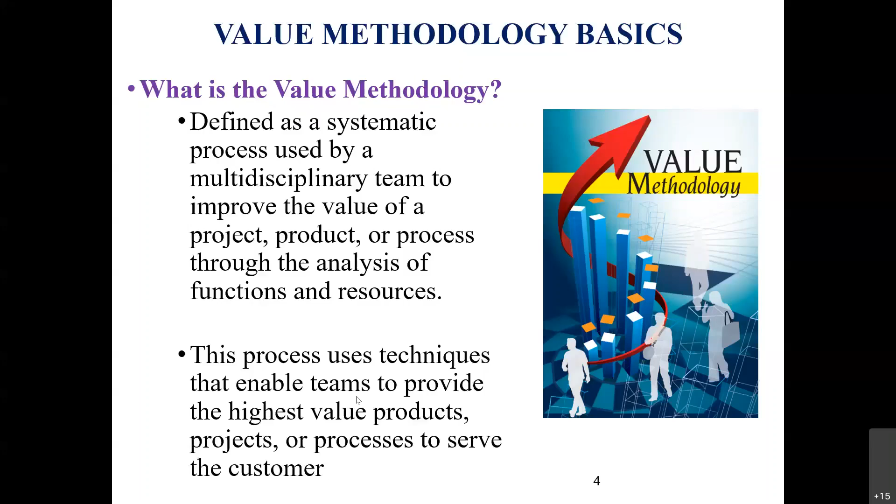So today the topic is value engineering. So what is value engineering? When you apply the value methodology to new products, projects, or processes, it is called value engineering. When you apply the value methodology to existing applications such as manufactured goods or projects, it is called value analysis. So value methodology can be either value analysis or value engineering. You can also call value engineering value methodology and vice versa. Let me give an easy example.

If you take a vehicle, it can be a Tata, Hyundai, Mahindra, or Ford. Let me take the Ford EcoSport for your understanding. The Ford EcoSport is already launched in the market. If you apply the value methodology to this existing product, which is already in use in the market, then it is called value analysis.

Let me give another example, of value engineering. If the company is going to launch a product in April 2021, and you apply the value methodology to the new product, project, or process which is going to be launched maybe next year or six months down the line, then that is termed value engineering. Okay.

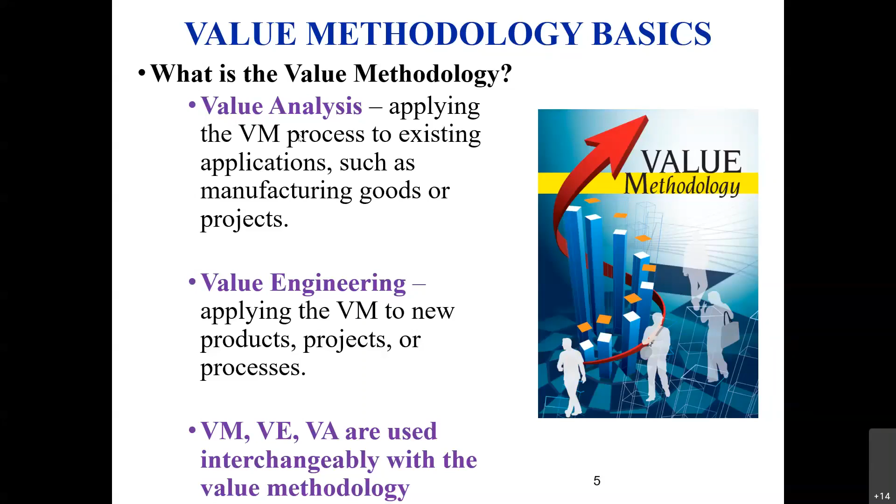You can use value methodology, value engineering, and value analysis interchangeably. Always remember that value methodology is a common name which can be used for either value analysis or value engineering. But there is a difference between value engineering and value analysis. Today I'm going to give some case studies which include not only value engineering but also value analysis. Okay, and this is very important.

First I will tell you what value methodology is not. Many would have thought at the start of the session that value methodology is a cost-cutting exercise. No, it is not at all a cost-cutting exercise. And it's not a quality reduction process; in fact, we are also going to increase quality through value. As I told you in the first slide, we have to create value without any compromise on quality. And value methodology cannot be applied without top management support. You need top management support to achieve it. This is an important thing you need to understand.

So let me go to what value methodology is all about. It's a process to identify unnecessary costs. This process will help you identify unnecessary costs and also unnecessary functions. And value methodology will help you identify potential performance improvements. It will also help you get alternatives while assuring quality, reliability, and life cycle cost.

What is life cycle cost? Life cycle cost is nothing but the overall cost required to manufacture the product. For example, it can be the labor cost, which includes indirect labor cost, and material cost, which includes direct and indirect material cost, overhead expenses, and miscellaneous costs, all included as part of life cycle cost. And the very important thing is that you need to meet the customer expectations and also try to exceed them.

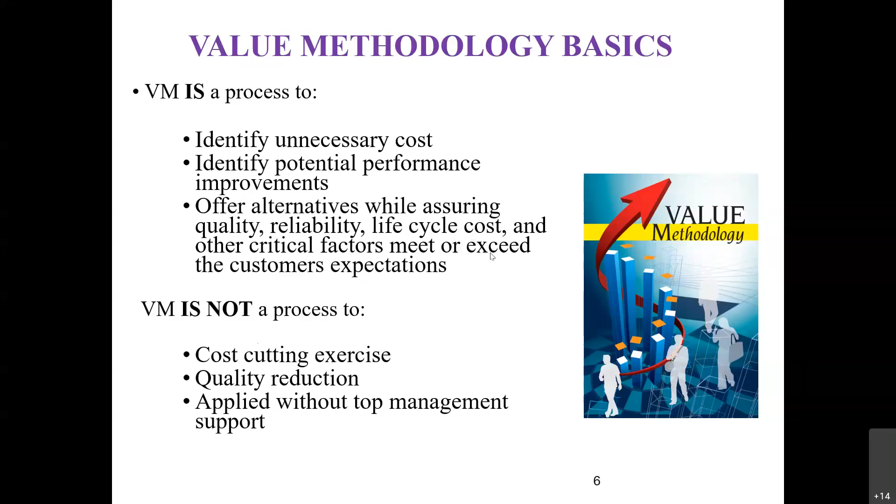In many cases, even if you are not exceeding the customer expectation, at least you have to meet the expectation. Okay, and this value methodology will help to meet the customer expectations.

And coming back to the value methodology history, this value methodology was started during World War II, in which Mr. Lawrence D. Miles is said to be the father of value engineering and also the father of value analysis. And according to him, the customer wants a function. Okay, what the customer really wants is a function. People want a function; they do not want the things.

Okay, what is the use when you're purchasing a vehicle which does not have an engine and transmission? Okay, so you can consider the vehicle as a thing, but the vehicle needs to have some function. Basically it's used for a mobility purpose. It needs to have all the required parts for its mobility. So the people want the function, not the things. So this is very much important.

And he is said to be the father of value methodology. According to him, the function analysis is very much important. So that's why even the definition of value methodology itself says that you are going to use the cross-functional team to achieve the value through the analysis of functions and resources.

Okay. So according to Mr. Lawrence D. Miles, the customer wants a function, and for this the company needs to do analysis, and that analysis is nothing but function analysis. And this function analysis is said to be the heart of the value methodology, so that you can achieve the value through the particular product, processes, a project, or even services.

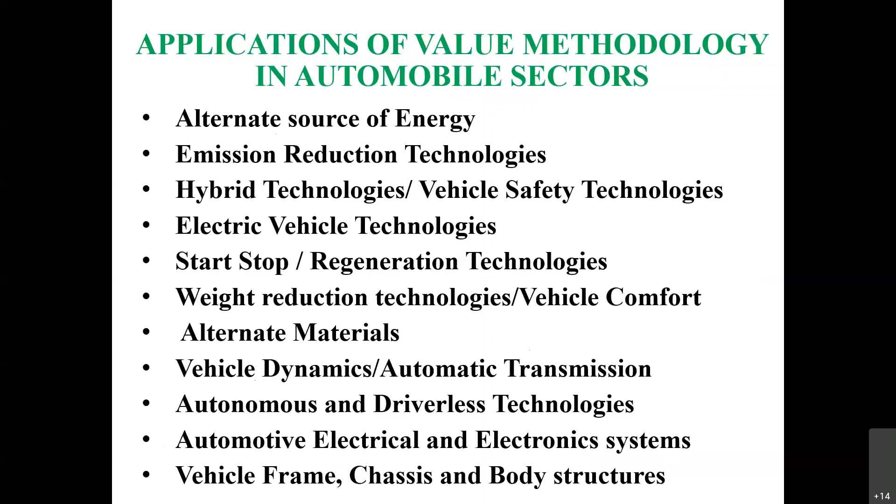So why do we need to use this value methodology? We need to use it to save time and to save money. Money is nothing but a resource, and time is also a resource. In fact, you are also going to improve the quality. At the same time, you are also going to satisfy the customer. All these are possible with the help of a cross-functional team, and that is possible by building proper teamwork.

So when you're using the value methodology, you are going to get all these advantages. You are going to save resources, which are time and money, and you are also going to improve the quality, which is nothing but a function. This is possible with the help of a cross-functional team or stakeholders, through teamwork. And finally, you're going to satisfy your customer. That's why you're going to use this value methodology.

You have a lot of values: social value, political value, economic value, judicial value. But as far as engineering application is concerned, the economic value is very important. This economic value has four types of values which this value methodology mostly deals with. The first one is the cost value: what is the cost of the particular product, process, project or service? That value you call the cost value.

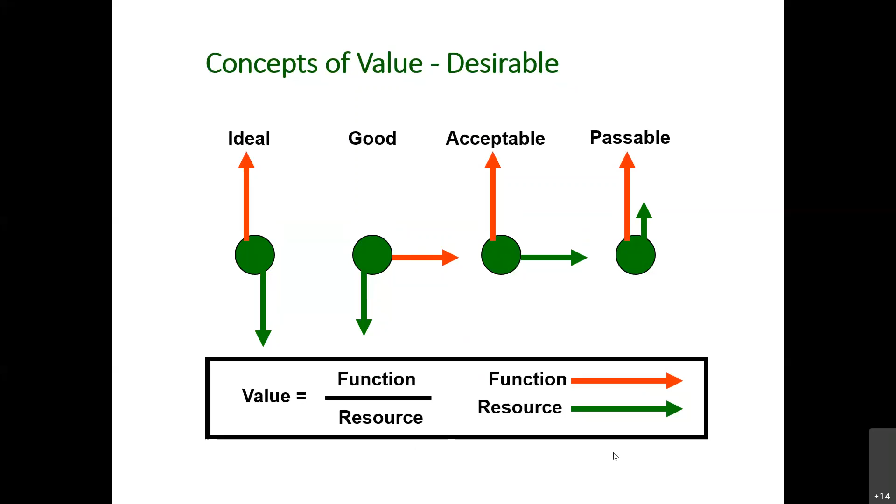So let me go to the function. You know all about the cost, but function is very much important. So what is called a function? Function is nothing but the intent or purpose that a product, process, facility, system or service is expected to perform, such that it will meet the need and want of the user. You need to satisfy that, and you should also make that particular item or service work as well as sell.

Say for example, when you're buying the brake from companies like Brakes India Limited, what OEMs like Tata, Mahindra, Ford, or Nissan will look into is that the brake will meet the want of the user as well as the need of the user. The user here is nothing but a customer. They will also see that the brake will work properly. At the same time, when you are selling the brake, you should ensure that the brake is also saleable.

Say for example, I told you about the exchange value. After a particular usage of the vehicle, you can also exchange the vehicle, so basically you're going to sell it. So when you're considering the function, you should ensure that the product you're going to purchase meets the need and want of the user. At the same time, it should work, and it should also be made to sell after a particular usage of time.

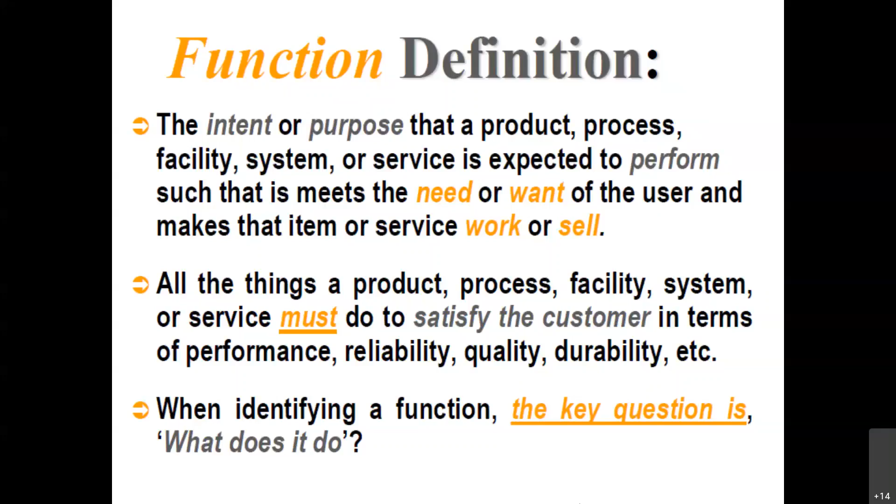So there are some facts about function. Function is nothing but what the customer is buying. You need to understand what functions the customer wants and needs, and what functions are not appreciated or not required. You need not provide functions that are not appreciated or required by the customer. So you need to understand the customer requirement in a very strategic manner, and in what cost-effective ways the company can provide the functions. That is very much important.

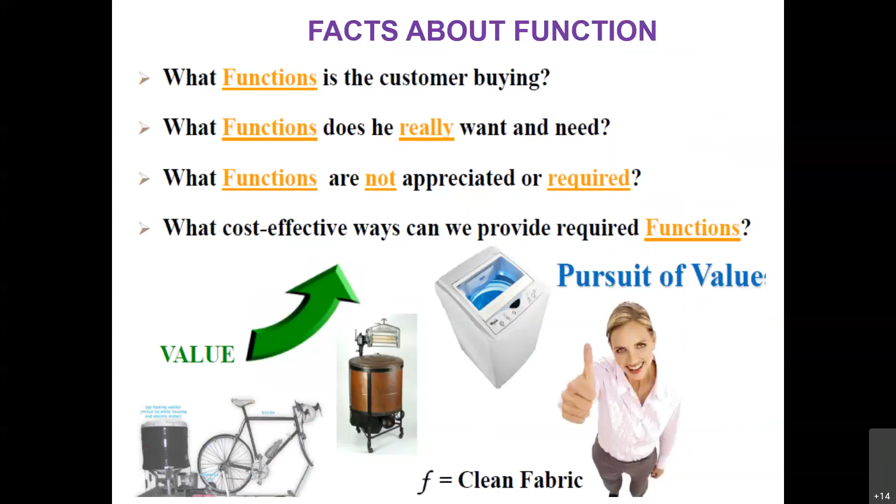And the one advantage with respect to the automobile is that volume is too high. You can take any OEM; all the OEMs' volumes are going to be higher. And when you save even 3% or 1% cost for one vehicle, say for example, if the particular vehicle is having 10,000 quantity in a month, you can have a very good saving. And again, in a year, you can calculate how much it is saving. So it is always advisable as far as the automobile is concerned.

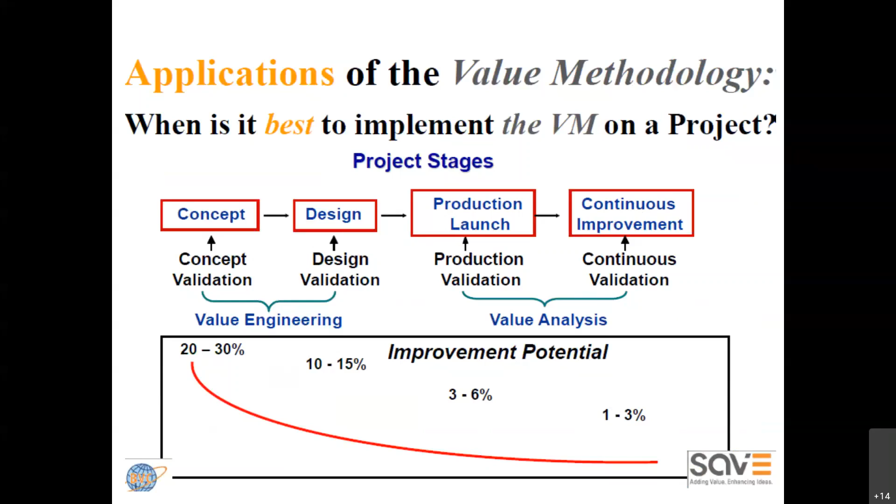And I normally stress more on value engineering rather than value analysis. But as far as automobiles are concerned, I always stress both value analysis and value engineering equally, because I told you the volume is going to be higher. But when the volume is going to be lesser, apart from the automobile sector, there are a lot of sectors, like machineries or heavy industries, for example. If you have less quantity, then value engineering is better than value analysis. But as far as the automobile sector is concerned, I always prefer both value analysis and value engineering equally.

Again, I told you, when you are applying value engineering for a new product, it starts with the concept. You have a huge potential net saving. But when the number of stages increases, the potential cost saving through value engineering gets reduced. At the same time, the implementation cost is also going to increase. The implementation cost is basically the validation cost. You need to validate it.

So suppose you are changing the material from aluminum to plastic, or cast iron to aluminum, or from X to Y or Y to Z, or when you're changing the supplier from one company to another company, you need to validate it. While you are doing validation, you need to go for some testing, for which you need to spend some money. That's why it is always good to test and implement the cost saving proposal at the start of the project. The implementation cost will be lesser, but when you are implementing any new ideas after production, you need to do a lot of validation, for which you need to spend money on validation cost.

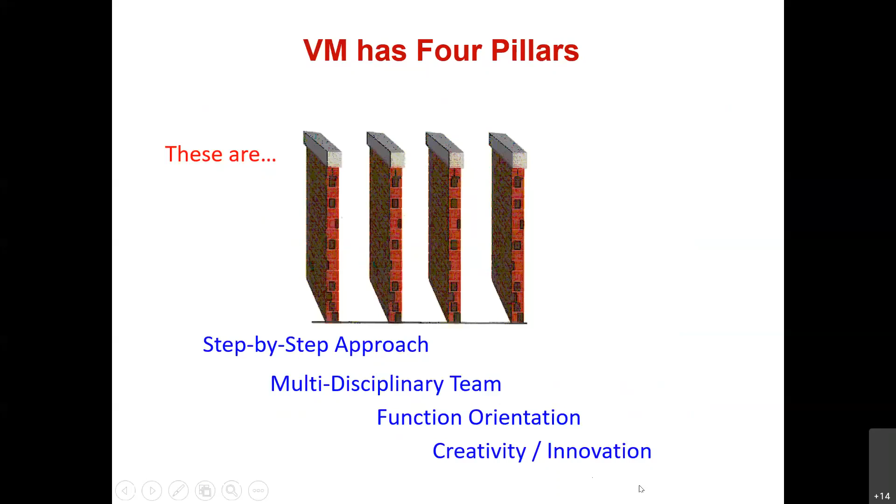I will just touch upon the manufacturing also. This value improvement is also possible in supply chain and also in manufacturing aspects for automobile application. But I'm going to give you some of the case studies with respect to products. Okay. I'm not going to give you too much on processes or projects or services, but this can be applied even to those sectors as well. If you are from a project background, or a process background, or a service background, please do let me know. I can give you an overview for that as well.

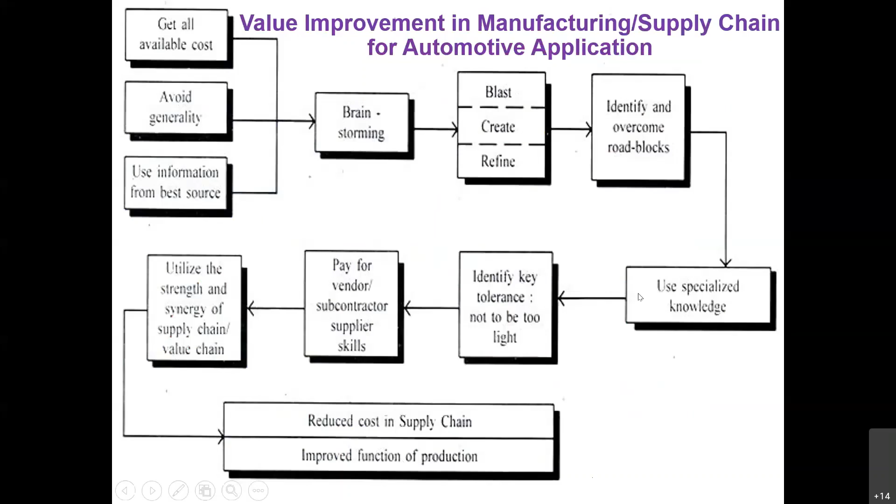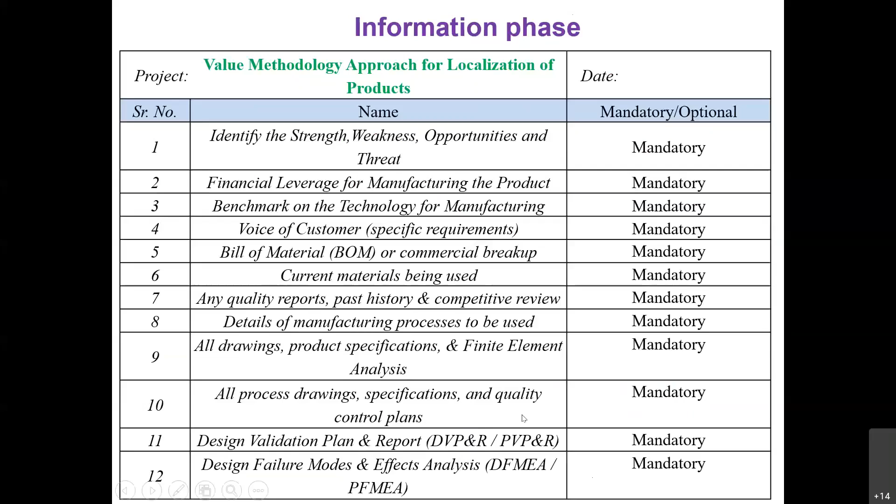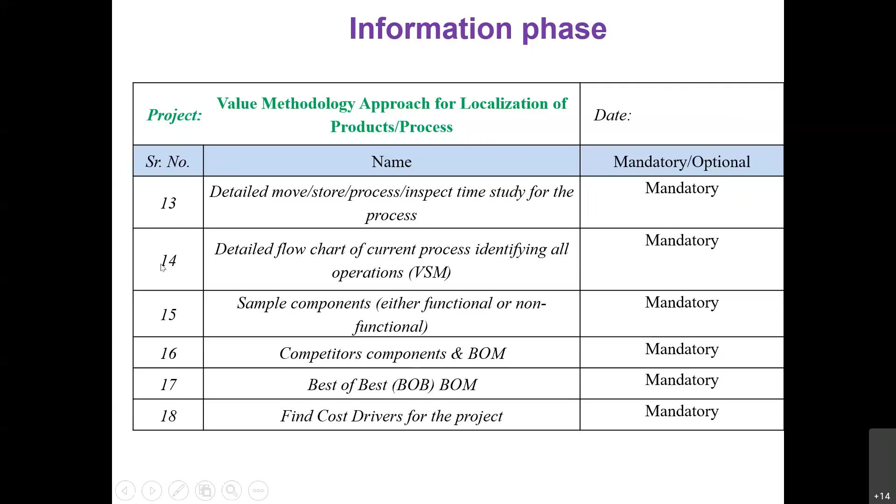the ideas can be easy to implement, or sometimes it may be hard to implement. So I need to identify whether it is easy to implement or hard to implement. But definitely you are going to get huge cost saving because you are going to reduce the weight. Or at the same time, I will take another simple example for you. I'm going to convert the aluminum manifold into a plastic manifold. So aluminum AlSiCu3 material I'm going to convert to polyamide PA6 with glass fiber of 30%.

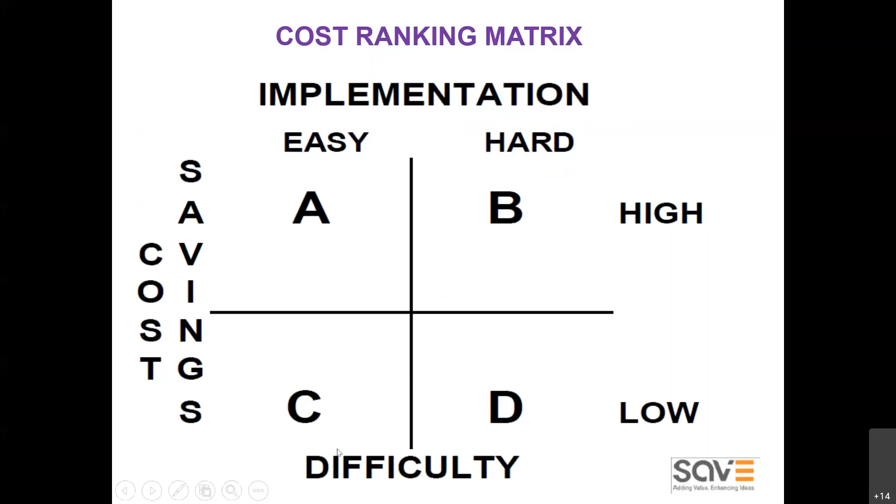Even this cost ranking matrix can also be applied in a different way, like A, B, C, D, E, F. So here A is the idea which is having high cost saving, which is applied for a running change, which is already in use, by changing the diameter, by changing the thickness, by changing the material, by changing the optimization of the design.

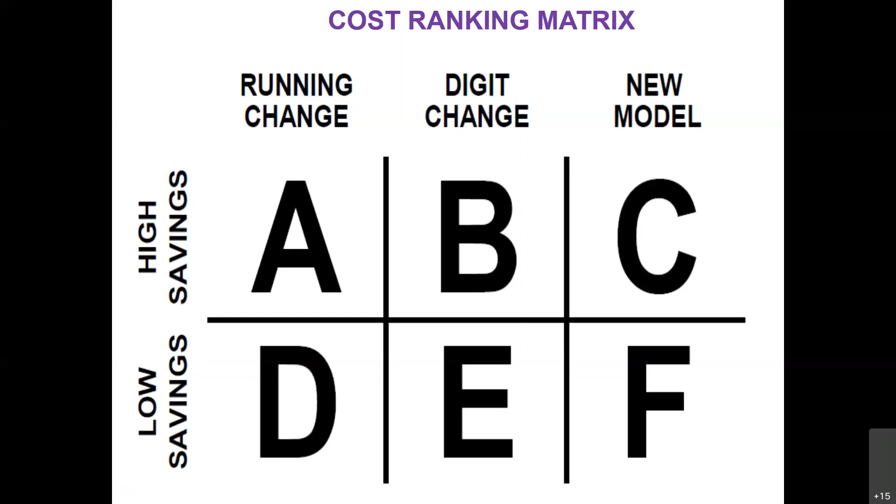So for a running product, if you do any cost saving, you can do it high saving as well as low savings. You can also do the digit change. Digit change in the sense that the thickness reduction, height reduction, or width reduction. And again, for a new model also you can go with the cost ranking matrix, high savings as well as low savings. This A to F just for easy purpose I have given; you can use as per your convenience, as per your company norms.

Next, finally, you have to go for a business case, because you are going to do the testing, which involves the tooling cost, development and validation cost. So you need to understand what is the total cost for implementation. What is the cost saving that you're going to get for one particular product? Then, with respect to the volumes, you can also understand what is the overall volume that you have for a year, and what is the overall saving that you can get when you're going for this value methodology approach.

You can also calculate the return on investment or ROI, and you can also present to the top management that whatever the money you are going to invest, you can get it back in 3 months' time or 6 months' time. You can present it to the top management, and basically, if you are going for a localization, this business case can be applied, but this template can be applied in a much better manner.

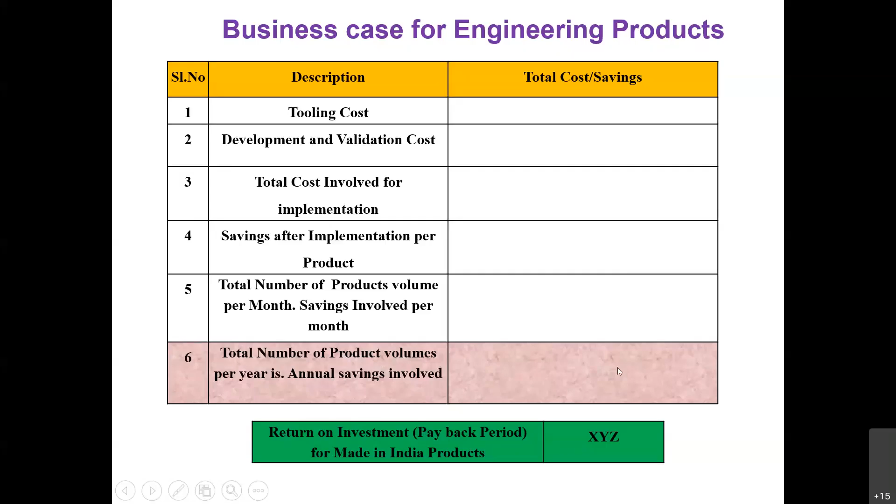Okay, so when you're going for a framework of any idea generation, you need to eliminate the ideas.

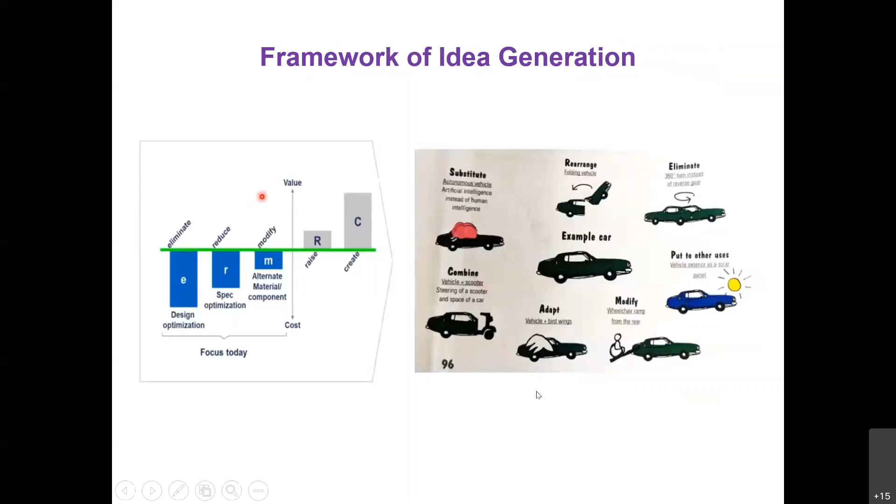There are many ways how we can achieve the value. The first one is by localization of the product, processes, services or projects, by changing the supplier. Say for example, if you're changing the piston supplier from Federal Mogul to Borgon, Shriram Pistons or India pistons. When you're changing the supplier, there will always be a cost saving.

Function improvement also you should look into. By changing the material you can achieve the value methodology. By doing optimization, you can achieve the value methodology. And again, make or buy decision: whether you want to buy or make.

Say for example, the crankshaft machining, camshaft machining or cylinder block machining. Some companies do it at the supplier end. Some companies have their own machining plant, their own OEMs, so they will do the machining of a cylinder block or a crankshaft.

Sometimes they feel that the cost reduction can be much higher when they make it in their own company. Sometimes they feel that when they're buying it, the cost saving is better, and at the same time the quality is also going to be higher. When they think that way, they can go for this make or buy decision analysis.

And we can achieve the value methodology by idea categorization, as easy and difficult to implement, with high to low savings. That's what I told in the A, B, C, D category. The ideas can also come from designers, tolerance stack-up, suppliers, experts, consultants, and the voice of customer.

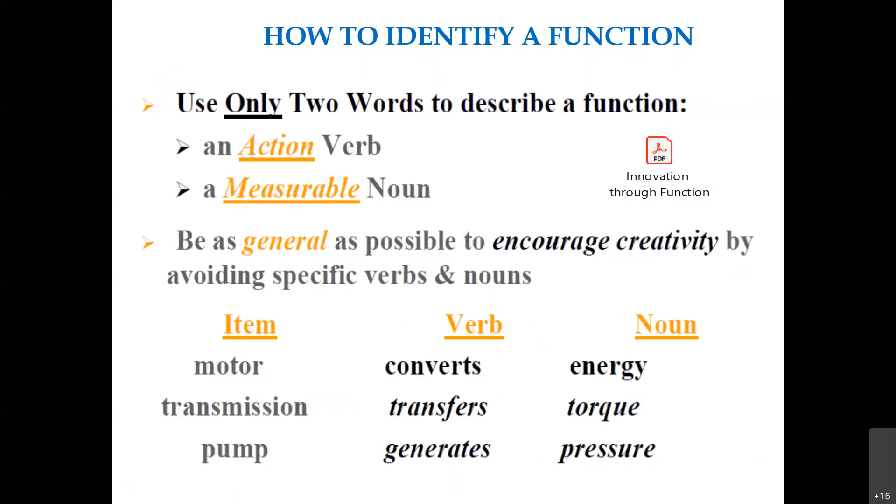So here, when you're going for a function phase, you need to ask the question: what are the key functions of the particular product? So you need to identify the basic function and secondary function. You should ask the key question: what are all the different key functions worth? Okay, you should understand what's the worth and what's the cost also, and which functions can be eliminated and combined.

Sometimes two functions can be combined. Sometimes some functions can be eliminated. You need to identify. And the technique here is the unnecessary and concurrent functions can be eliminated. And understand what functions have poor value. You can eliminate that particular function which has the poor value. And as I said, you should also look for the optimization of the design and drawing tolerances.

So in the function phase, you need to do some tasks which involve random function; I will tell you what's the random function. Then you need to classify the function into basic function and secondary function. Then you need to go for a FAST diagram, called function analysis system technique diagram. And you need to analyze the cost worth relationship for each individual function. Then you need to complete the cost function worksheet in the function phase.

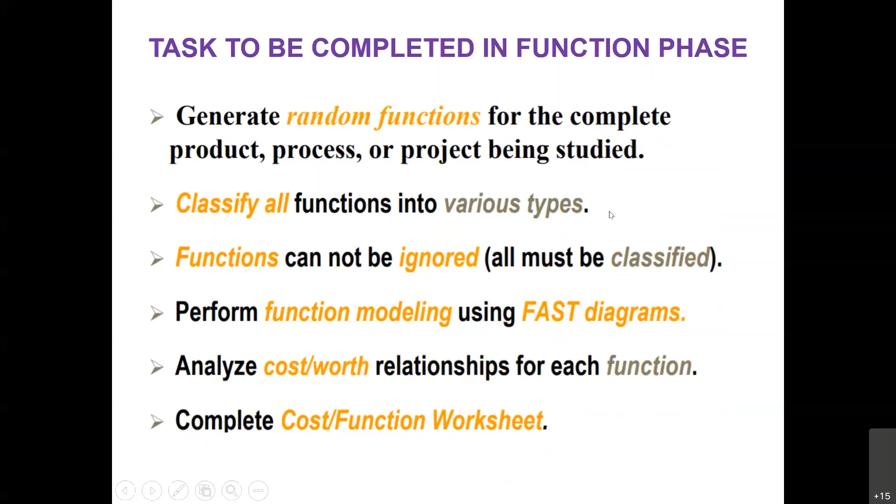Okay, this is the template that normally we have for a function analysis, random function analysis. So here you need to write down the component name. Suppose the brake is having a brake pad, caliper. You need to list down all the component names, basically bill of material, and what is the cost involved for the bill of material. Then you need to list down all the functions randomly, basically basic function and secondary function, using verb and noun combination.

This is the template. Then you need to allocate what is the cost percentage, what is the cost involved for a particular individual function. Okay, and what is the value? What is the function cost value? You need to put it. This is just a normal template that you have. This is the example of a gearbox. Gearbox is having a lot of parts. I have taken only 3 parts: housing, gears, and shaft. This is just an example. This I have used for training purposes.

The housing component of a gearbox has a cost of 3,213, which contributes to 57% of the overall cost of these three. And gears is having 1,714 rupees, and shaft is having 727. Okay. So first I need to understand which is the highest cost contributing factor, and you need to list down.

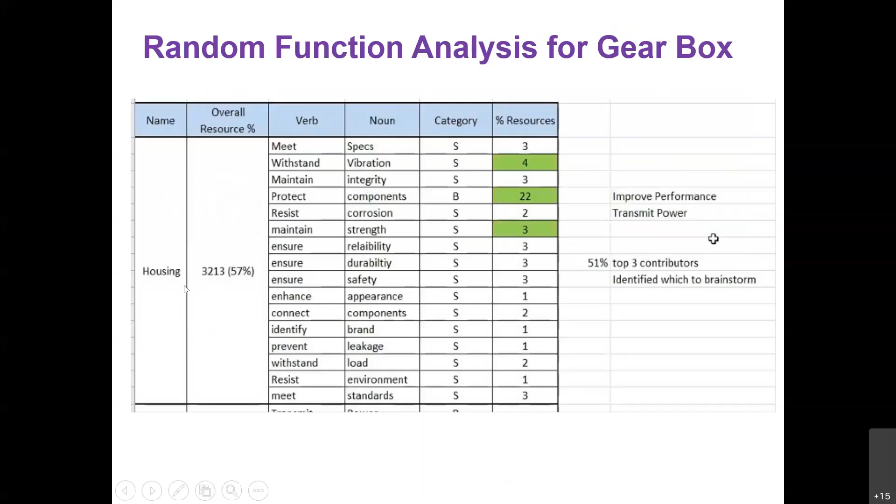Okay, and we should list down all the parts that are involved in the gearbox. So here I have taken only 3, just for training purposes or just for understanding purposes to explain to you. So what are all the functions of a gearbox housing? Okay, the basic function of a gearbox housing is to protect components. Inside the housing, it is having a lot of components like gears, shafts, etc. So what is the basic function of a housing? The basic function of a gearbox housing is to protect components. One verb and one noun.

You have different functions of a housing. It should meet specification, it should withstand vibration, it should maintain integrity, it should resist corrosion, it should maintain strength, it should ensure reliability, durability, safety, appearance. It should also connect components. Even the housing should identify brand. Who is the supplier for the housing? Okay. For that, it should identify the brand.

It should also prevent leakage. It should withstand load. It will also receive force. It should also resist environment. It should meet standards. So you need to list down all the functions of a housing, which is a part of a gearbox.

And next is the gears. What is the basic function of a gear? The basic function of a gear is to transmit power. And you have different functions apart from transmitting power. It transmits torque, it generates rotation, it ensures reliability. So you need to list down other functions of the gears.

Similarly, the shaft. What is the basic function of a shaft? It transmits power. In addition to transmitting power, it also transmits torque. You need to list down all the functions similar to what you have done for gears and housings.

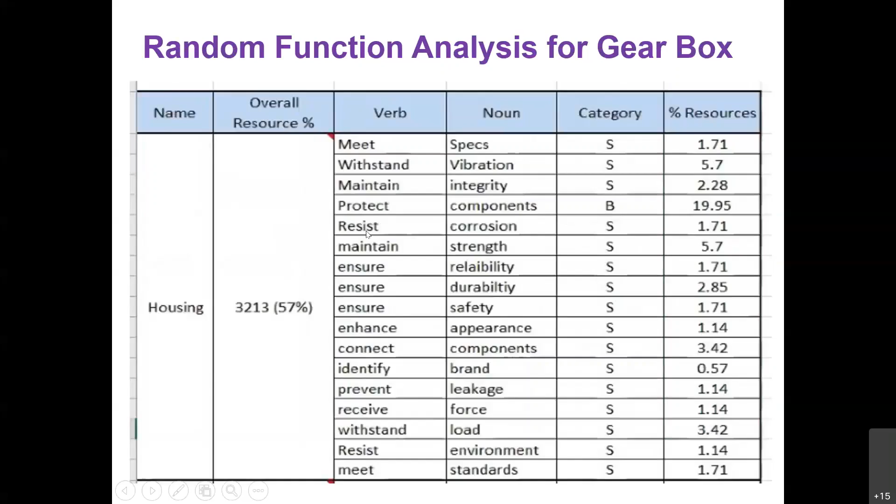First, you need to list down what is the basic function of a part. What is the basic function of a gearbox? A gearbox may have housing, gears, and shaft, but here you need to list down the basic function of a gearbox alone. Then, what are the secondary functions? You need to list them down using the how technique and why technique.

You have the project objective. These are all the functions that are required to achieve the project. And a one-time function involves the functions which are required one time. Say, for example, ensure warranty. All these are one time.

Or protecting the product. Say for example, if the brake or suspension is coming from a tier 1 company to an OEM, the tier 1 company is going to ensure you warranty, and at the same time they are going to pack it in a safer manner. They are going to protect the product and send it. So all these are one-time functions.

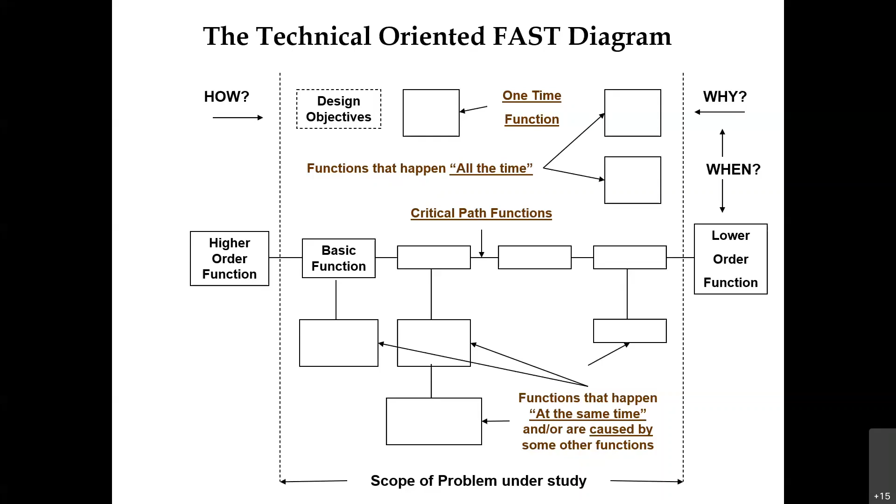All-the-time functions involve functions which are required before you sell the product to the customer. Enhance appearance, ensure safety, reliability, durability. These are a few examples of all-the-time functions. Let us go with the FAST diagram for a gearbox. The basic function of a gearbox is to transmit power.

Why transmit power? When I ask the question why to the basic function, it becomes a higher order function. So why do I need to transmit power? The higher order function is enhance performance. The basic function of a gearbox is to transmit power. How to transmit power? By transmitting torque.

How to transmit torque? By generating rotation. How to generate rotation? By transferring force. How to transfer force? By receiving force. How to receive force? By applying force. I'm going to apply force to the gears. The gear receives force.

Why receive force? To transfer force. Why transfer force? To generate rotation. Why generate rotation? ... It should transmit to increase my performance. So here you follow how logic and why logic. This is a lower order function, this is a higher order function.

And project objective indicates the objectives, which involve meeting specifications, meeting standards, preventing leakage, providing strength, durability. All these functions you need to list down here. And a one-time function is, for example, ensure warranty. And all the all-the-time functions you need to list down here.

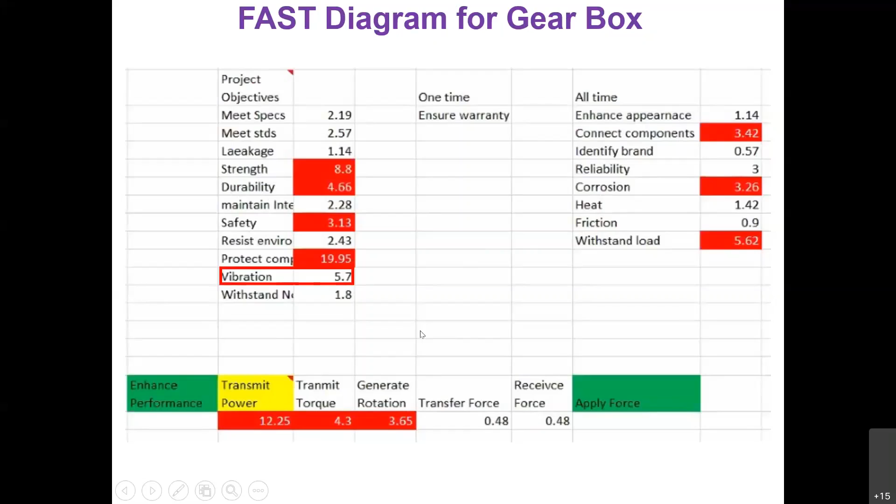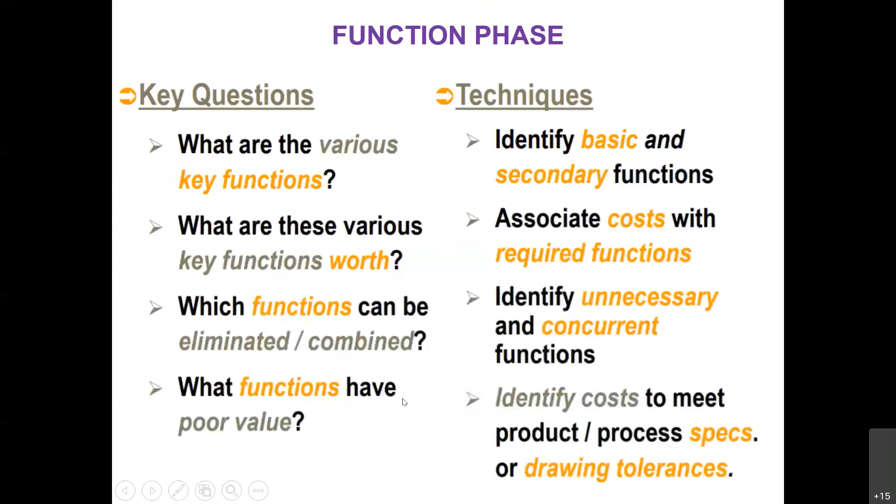Then you can create ideas for the highest cost contributing function. You don't need to take all the functions for your idea. The top three or top four functions contributing to the highest cost, then you can go for idea generation for those particular functions. Idea generation can be the ideas what I told. You can use all these techniques for your idea generation, but all these techniques should be used considering the functions.

Let me give examples with respect to the FAST diagram for some automotive components. Basic function of a vehicle leaf spring. The basic function of the leaf spring is to improve comfort. Why to improve comfort? To enhance drivability. When I ask the question why to the basic function, it becomes the higher order function. How to improve comfort? By maintaining damping and also by absorbing shock. How to absorb shock and maintain damping? By distributing load. How to distribute load? By transferring force, by applying force.

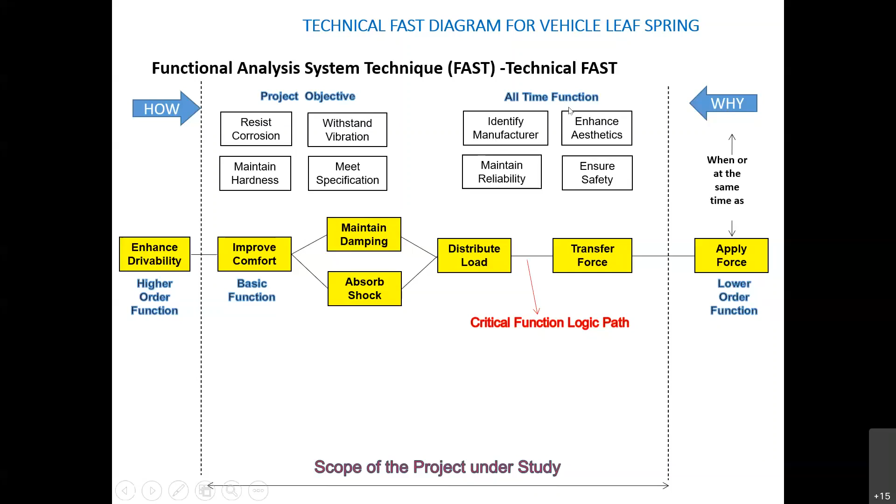The leaf spring should withstand vibration. It should meet the specification. It should also maintain hardness. And the all-the-time functions: it should identify the manufacturer, it should enhance aesthetics, it should ensure safety. At the same time, it should maintain reliability.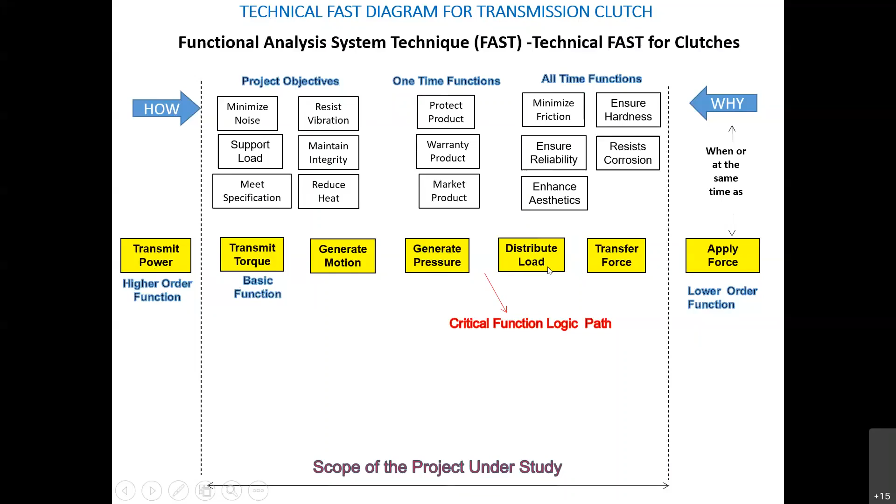Okay, let me go with the clutch. What is the basic function of a clutch? The function is to transmit torque. And the way to transmit torque, to transmit power, it's almost the same. How to transmit torque? To generate motion. How to generate motion? By generating pressure. How to generate pressure? By distributing load, by transferring force, by applying force.

Okay, you know the synchronous ring in a transmission, where the basic function is to match speed. Why do you need to match speed? To avoid slippage. The company is spending money only to match speed, not to avoid slippage, because the basic function of a synchronous ring is to match speed. The slippage gets avoided. How to match speed? By generating movement, by transferring torque, by distributing load, by maintaining position, by enabling rotation, by transferring force.

Function of your crankshaft. Again, the basic function of your crankshaft is to transmit torque. Why transmit torque? To develop power.

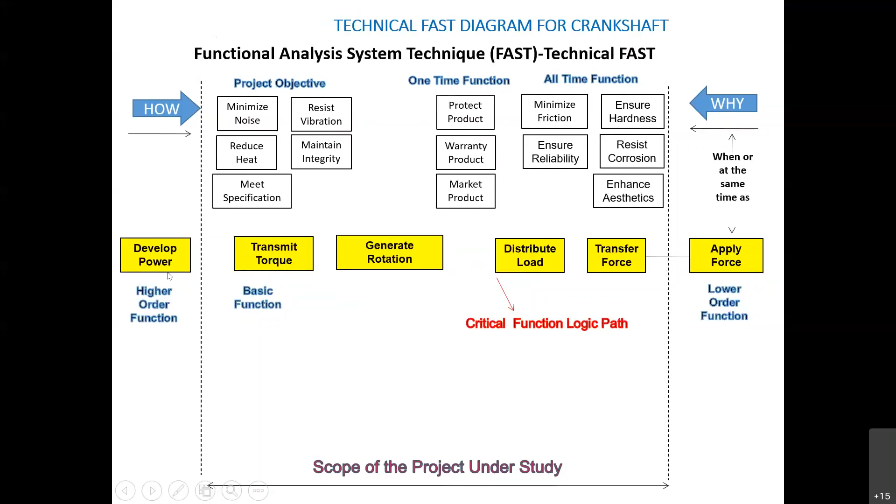Okay, this is the compressor, the AC compressor in an automotive vehicle. The basic function of a compressor is to condition air, for comfort. How to condition air? By compressing fluid and also circulating air. And how to compress fluid? By generating pressure, by connecting circuit, by selecting mode, by applying force.

Why do I need to apply force? To select mode, to connect circuit, convert energy, to generate pressure, to compress fluid, and also when I'm compressing fluid, I am also going to circulate the air, and finally I'm going to condition the air. So these are all the project objectives. You have one-time functions and all-the-time functions. Okay.

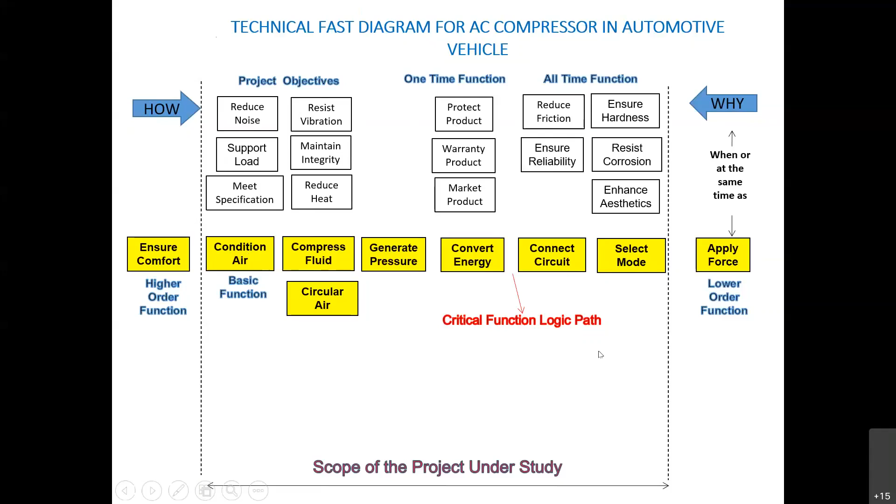So this is an example of a stamping process. The basic function of an overmold stamping process is to overmold stamping. Why overmold stamping? To bond the assembly. How to overmold stamping? By injecting plastic and also generating the stamping process. So you have different functions. It follows the how logic and the why logic.

So here the project objective is to verify the dimensions of the machines, maintain tooling, and also durability. The process should be controlled. And the all-the-time functions can be: maintain appearance, it should prevent injury, it should also ensure reliability, it should also reduce scrap. So this is just an example of a process as well.

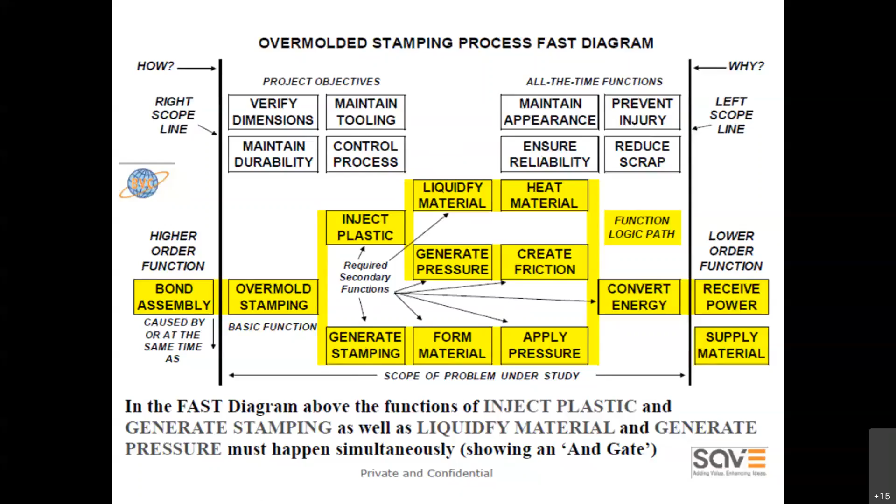Let us go for some of the case studies using function. Okay, so this is the utility pocket which has been replaced with injection molding. It is basically the bottle holder. This bottle holder was made of metal previously. That has been replaced with a plastic component using injection molding. So this is a bottle holder. Nowadays you use this injection molding process, so you have very good aesthetics.

In olden days, you had the bottle holder made of either sheet metal or metal, where the weight was also higher, the aesthetics were not good, and the cost saving is going to be lesser here. And this is an example of the value methodology. Before it looked like this, and after it looked like this.

Before that, you had electric power assisted steering, and now through this value methodology, you are going for hydraulic power assisted steering, and again the cost is going to be lesser. At the same time, you see here, it is not the cost saving alone. Hydraulic power assisted steering is provided in place of electric power steering. Both are achieving the same function, and the performance criteria are also the same. But the hydraulic assisted steering is going to have a huge monetary benefit.

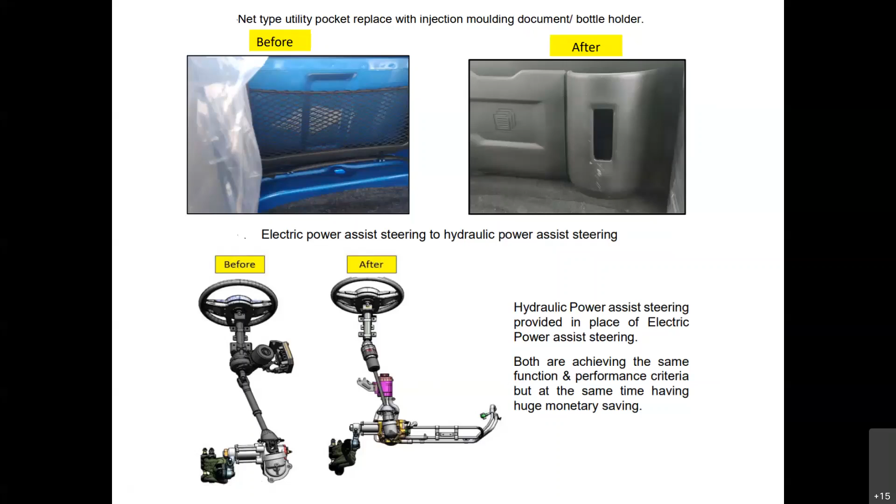And this is the value analysis that has been done in a vehicle door trim. So the whole trim is having the structure like this, and you see the structure of the whole trim, and you see the structure of the new trim having the armrest. Okay, and you see even the inner handle or the upper substrate. Aesthetic-wise, there is an improvement here, and even you see

even this is the switch bezel, and there is some modification which has been done, and the advantage we have with respect to this is the cost saving is going to be higher. At the same time, the aesthetic is also going to be much better with the help of the new door trim. And here the function is not going to get affected. At the same time, you are going to reduce the cost, and aesthetic is going to be higher.

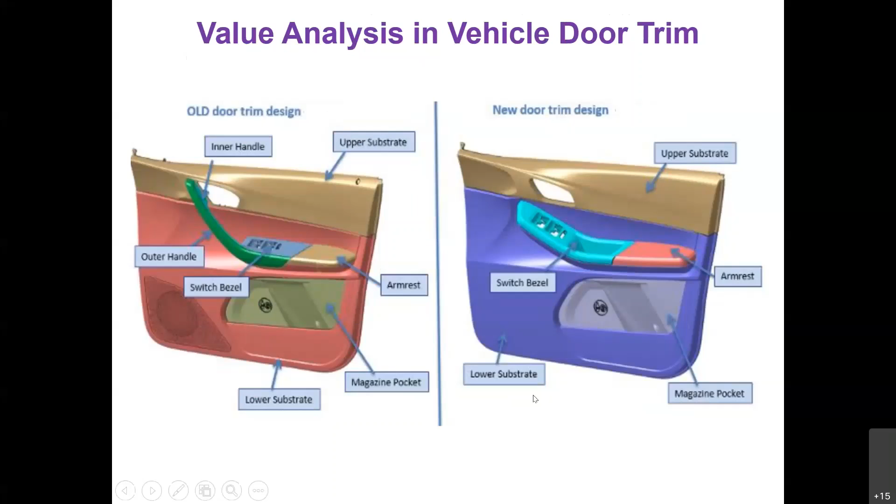This is the clutch housing. I have given you a FAST diagram. So here by analyzing the functions, I'm going to reduce the weight. Okay, and it's not just I'm looking at the product. I'm going to reduce the weight, but here the weight reduction of 10% will help you reduce the cost as

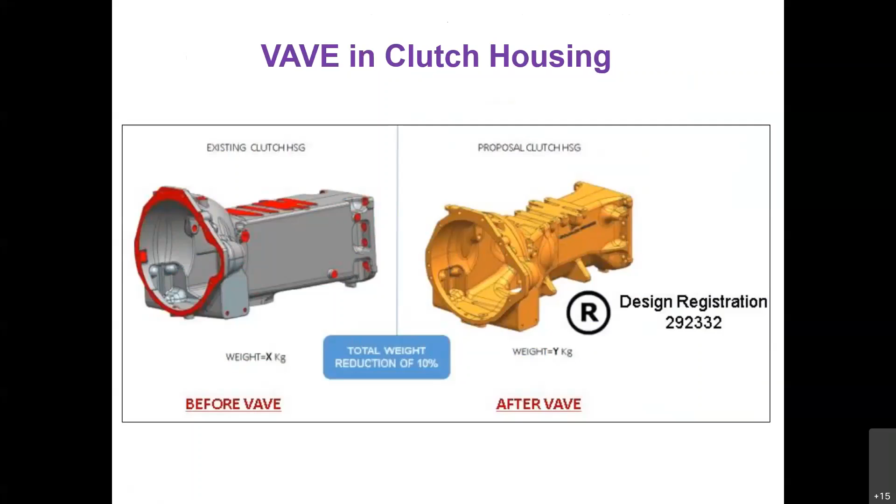well. And again, the weight you're going to reduce is not going to affect the vibrations or other aspects as well. So here, what is important is you are going to create ideas or generate ideas considering the functions, not generic things. Okay, so you need to look at the functions and then you create ideas.

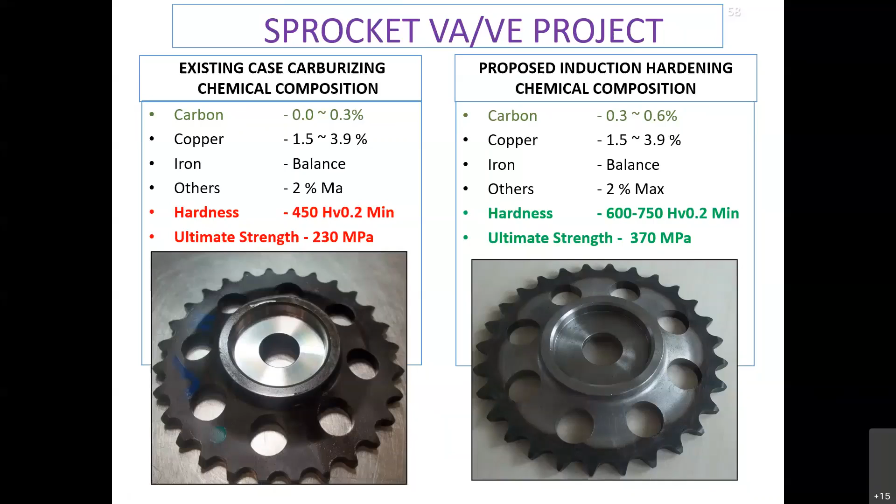At the same time, hardness is going to get increased. At the same time, ultimate strength is also going to get increased. So here you have an advantage where the value is getting increased by increasing the function and at the same time by reducing the cost. This is one of the examples which has been done in car roof rails.

This is the assembly of the old roof rail of a car. So this is the modified one. Basically, this roof rail is used for aesthetic, not only for aesthetic, even to hold some of the weight or object, but mostly people use it for aesthetic purpose. So here, without affecting the function, there is some change of the raw material from this to here. At the same time, not only the aesthetics, but even the function remains the same.

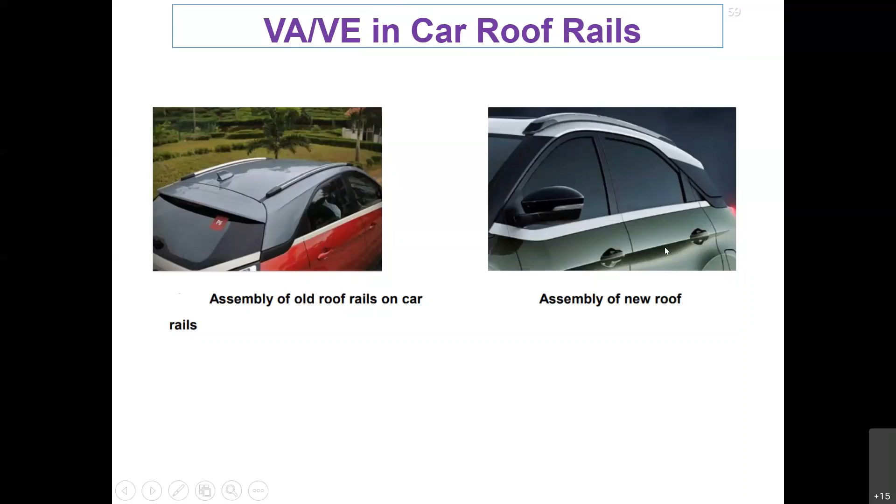So I told you this can be even applied for a manufacturing process. This is the connecting rod manufacturing process, before value methodology, which is having a lot of stages. It includes face grinding, boring, turning, slitting, milling, boring, again grinding, and then final inspection. So after this value methodology, without affecting the function or the process of the connecting rod, the manufacturing process has been optimized, and

here the cycle time of manufacturing gets reduced. And when you reduce the cycle time, you are going to reduce the manufacturing cost also. At the same time, the extra processes and extra machines which are there also get eliminated. So you have the better process. So you have lesser manufacturing cost. When you have a lesser manufacturing cost, your overall product life cycle cost gets reduced.

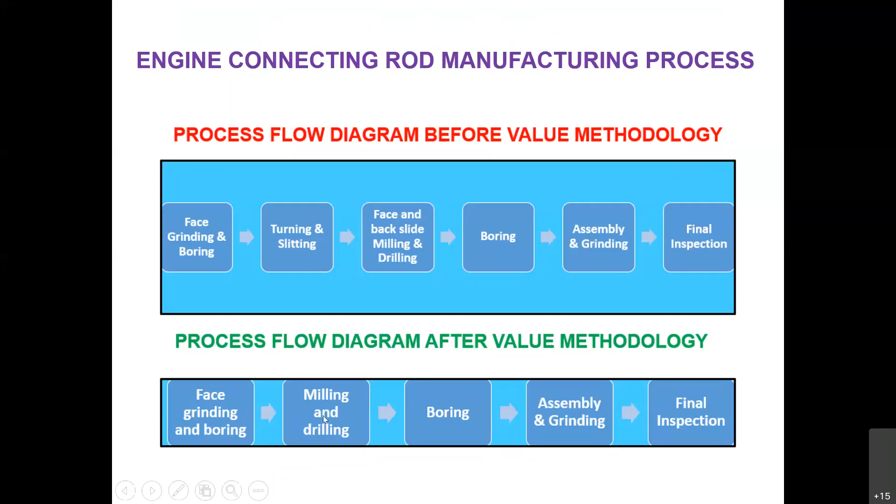This is one of the examples of a heat shield. This is the localized heat shield. But the function of a heat shield is to protect. Okay. So here the exhaust gas is circulating. The function here is to protect the product, okay, when it is exposed to high temperature.

So even the function here is to protect the EGR valve. So even the imported heat shield can be replaced with a localized heat shield. So when you're going for localization, the cost gets reduced. At the same time, you need to ensure that the function is not going to get affected. Here, the function is you need to protect the EGR valve. Okay, so it gets protected.

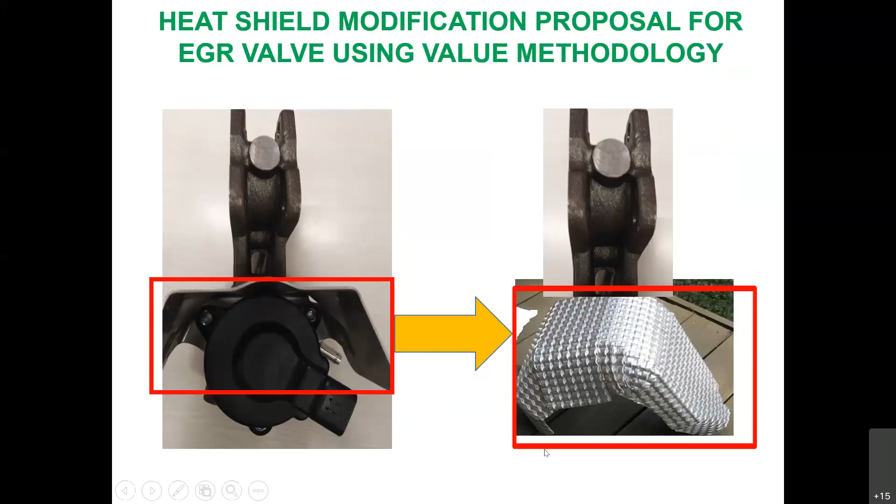And this is the example of the accessory belt drive system in an automotive engine. This is the existing proposal. You have a layout, the AC pulley, you have the alternator pulley, you have the auto tensioner, and also the belt. So what happens during the development stages?

So they have replaced the auto tensioner with the idler, okay, and also they have gone for a stretched belt, okay, and this helps for cost reduction. At the same time, the performance is not going to get affected. So we are going to ensure that the performance is not going to get affected with the help of simulation, also some of the analysis.

So you need to do all the validation, and you also need to do the physical validation, and you also need to do the establishing of the process. You need to do the concept verification as well.

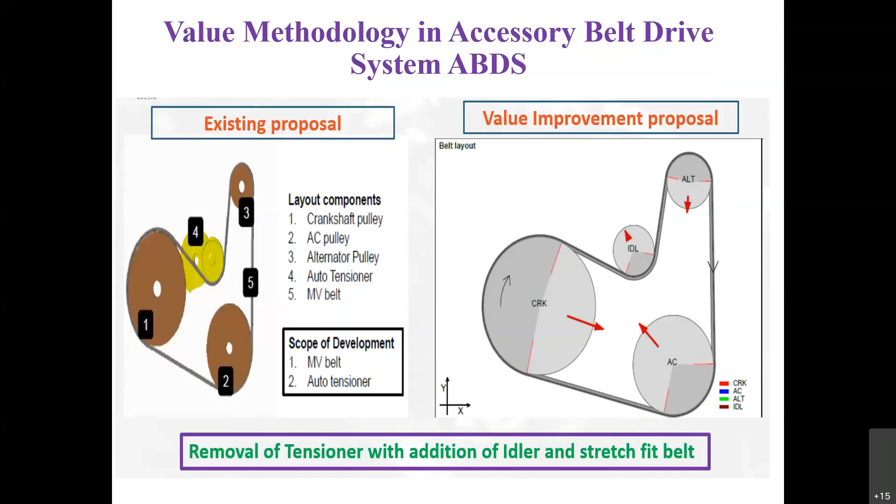Next very important thing is the variable valve timing. You know the function of a variable valve timing, which will help for reducing the emission. But this is one of the quite interesting things. So I'm going to eliminate the exhaust variable valve timing, exhaust VVT. But first I will tell you what are the advantages of eliminating this and how I'm going to achieve the function. The function of this VVT is to go for the emission reduction process.

So I can also reduce the emission in various ways apart from having the VVT as well. And again, that is a very big, vast topic. You see how the value methodology is being applied for this particular VVT elimination. So you have the exhaust VVT, and that has been replaced with the help of a camshaft pulley.

You have the trigger wheel, you have the position sensor, you also have the solenoid valve when you're going for a VVT process. So all this solenoid valve, position sensor, and also trigger wheel gets eliminated when you're eliminating the VVT. And the modified design is very simple and without affecting the function. There will be some drawback with respect to emission reduction.

Emission will not get reduced when you're eliminating EVVT, but at the same time, I'm going to compensate that with the help of other processes, either go with after treatment or the lesser cost, the multiple injection strategies. There are many ways where I can reduce the emission, and I have found out the other ways, but I'm going to reduce the cost of this design.

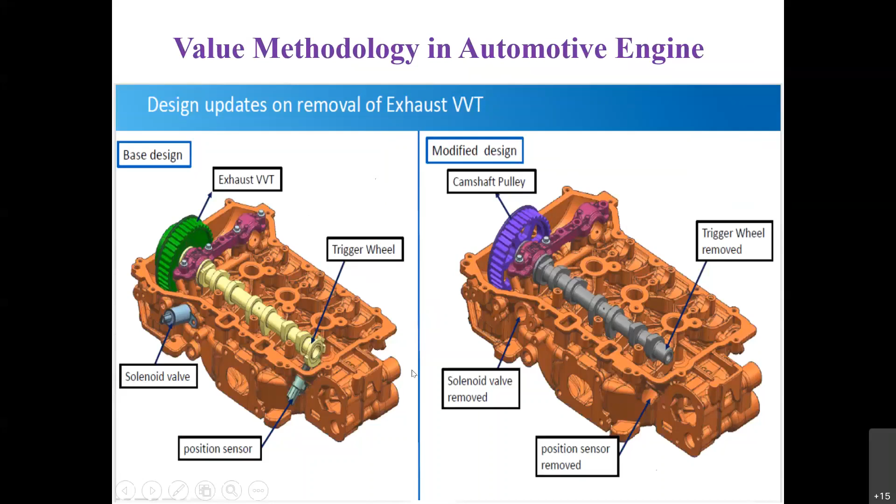I told you about value, which can be defined as a ratio between worth by cost. You know the cost, and what is called worth. Worth is nothing but the least minimum possible cost to achieve the function. Okay, to achieve the particular function of the particular product. And again, the worth can be dynamic because the worth is a subjective one. But you need to consider the worth without any regard or criteria.

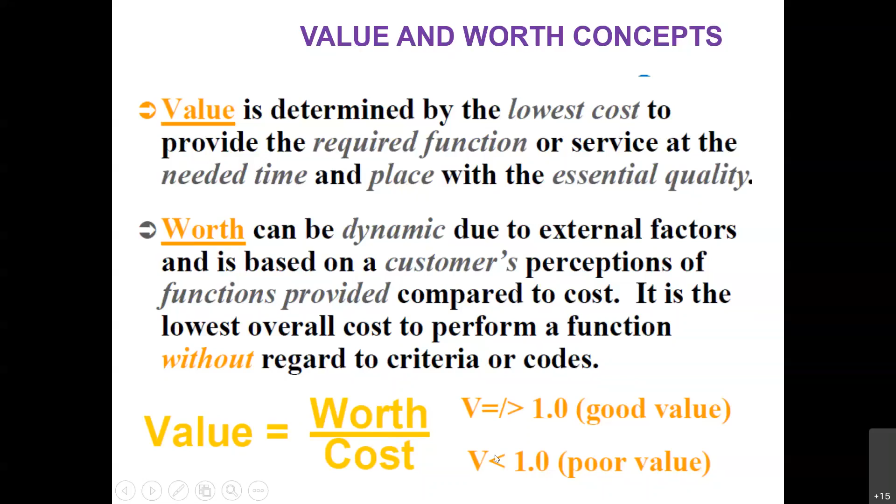So when you have the value greater than one, it is said to be a good value. When the value is less than one, it is called a poor value. You also have the value index, value gap. Value gap is nothing but the difference between cost to worth. When you have a higher value gap for your product, you should look for value improvement.

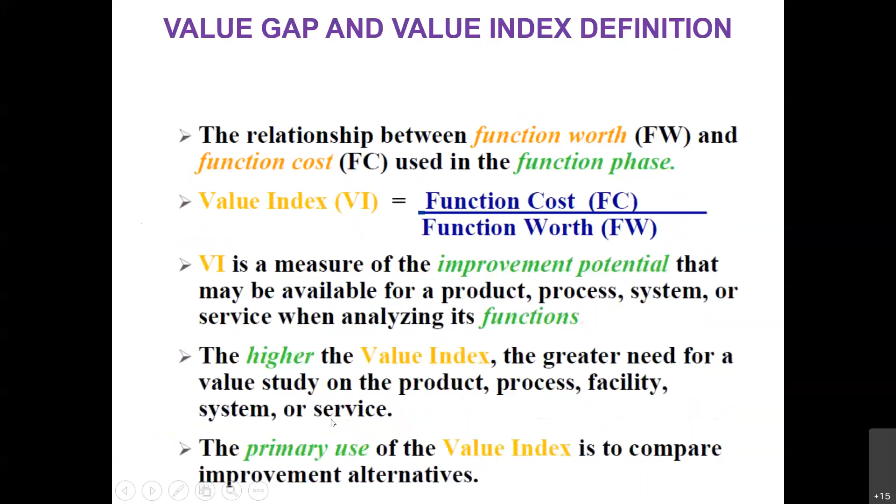And when you have a higher value index, which is defined as the ratio between function cost to the function worth, you need to go for value improvement. Higher the value gap, higher the value index, value greater than 1, you should always look for idea generation. And this idea generation is possible through the creativity phase, where you are going to create ideas considering the function.

Okay, so here you should always go for an innovation kind of thing. There is always a difference between innovation and creativity. Creativity is the generation of new ideas, whereas innovation is nothing but converting the ideas into an output. Okay, so whatever case studies I have done, it's not only the ideas created, but also the ideas get implemented. So when you implement ideas, it becomes innovation.

And our objective should be from invention or from creativity to innovation. We should always look for innovation, but that is possible only with the help of creativity, and creativity is nothing but the generation of new ideas. And when you generate new ideas using functions, you go for a lot of new creativity. And you see here, innovation is not what is being seen by everyone; it is what is not seen by someone that you need to see, and you need to look in such a way.

You need to have some thought process, and you should think in such a way that nobody would have thought. You need to go for that level of idea generation, but that can be possible if you go using functions. So this is a general template. This is the system, these are the subparts.

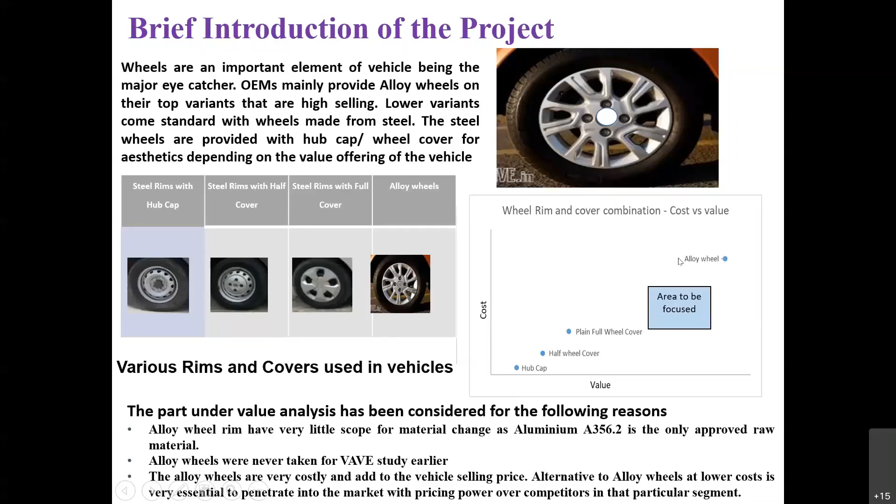The current material of the alloy wheel is aluminum A356.2. Here I'm going to collect all the information with respect to regulation, validation, durability, benchmark, styling, marketing inputs, drawings, cost sheet, the finish, the paint, the treatment, and the overall weight of the wheel. All this I need to get in the information phase.

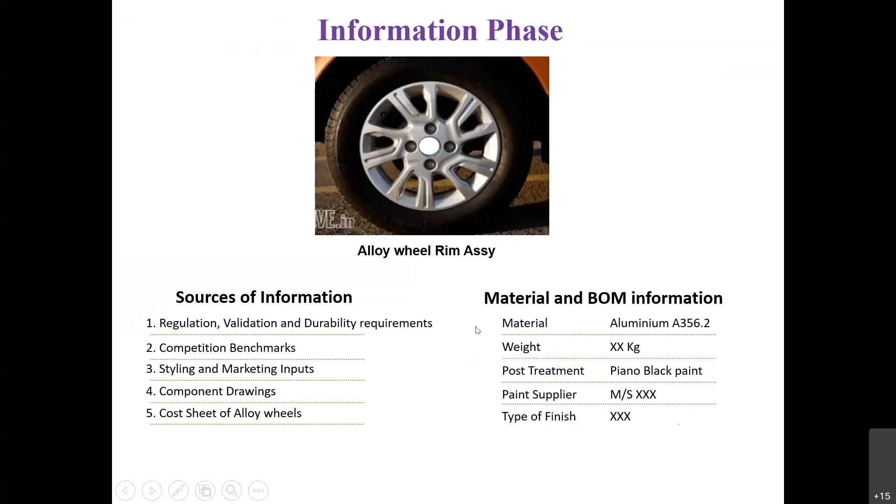Next is the function phase, where I'm going to create the FAST diagram. Here you need to list down all the parts of a wheel. So you have the wheel rims. What is the basic function of a wheel rim? It should support weight, transmit torque, mount tire. But normally you should go with only one basic function when you're going for a FAST diagram.

What are the other functions? It should maintain air pressure, provide brake cooling, mount air valve, mount weight, mount wheel cap, sustain torque, enable painting, maintain clearance, improve appearance, provide smooth ride, meet testing, be durable, meet the ELVD requirements, control imbalance, and also control runout.

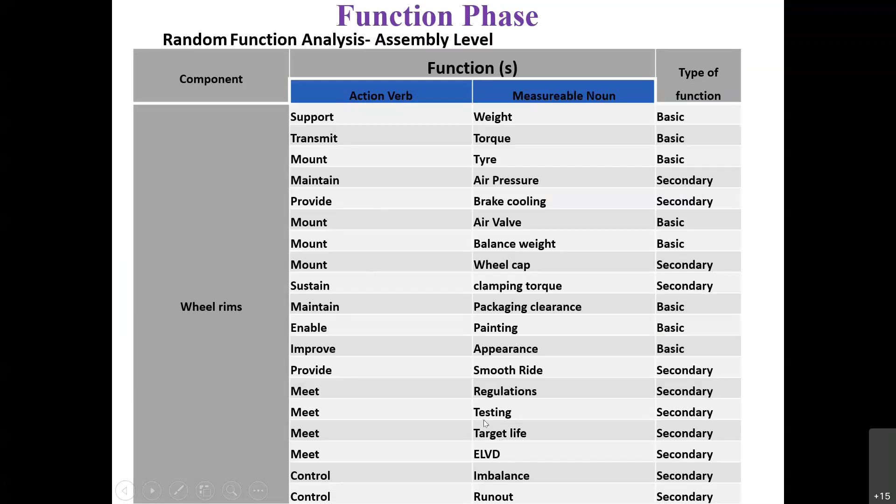Now we are going for a FAST diagram. The basic function of an alloy wheel is to transmit torque. Why transmit torque? To rotate. When you transmit torque, automatically the tire gets rotated. Our scope is only the basic function. So how to transmit torque? By connecting hub and tire. This is a scientific function.

How to connect hub and tire? By clamping hub. How to clamp hub? By mounting tire. How to mount tire? By providing material. So provide material to mount tire, to clamp hub, to connect hub and tire, to transmit torque. And in all conditions it should transmit torque. And the project objective is to improve appearance.

The all-the-time function is to meet regulation; at the same time it should also maintain the packaging requirements. So what are all the other functions? It includes cool brakes, mounting the tire, smooth comfort, controlling the imbalance and runout. All these are the other functions.

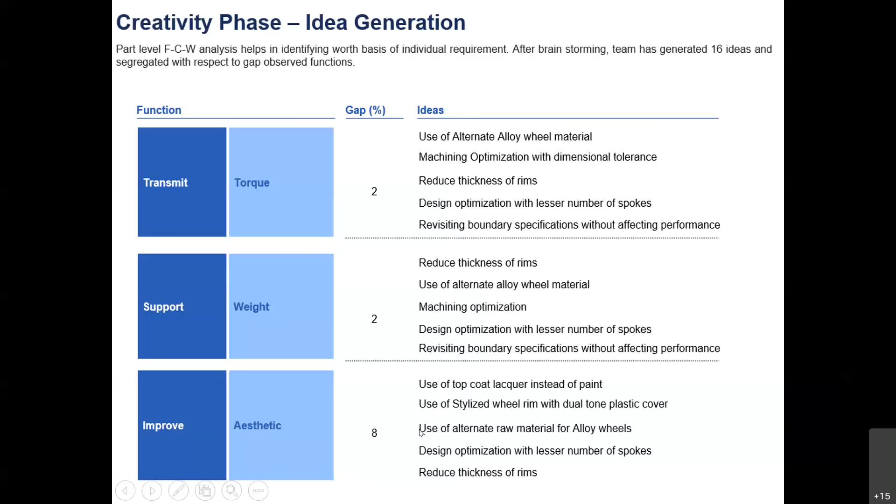You have different ideas, and next you have to evaluate the ideas. Whatever ideas you have taken here, it is not that all the ideas are correct. You need to take the ideas having the highest ranking based on the benefits, implementation time, manufacturing feasibility, performance. Considering that, out of 5 ideas, for transmitting torque, the best idea is to go for the alternative raw material for alloy wheel. And to support weight, the highest ranking is use of alternate raw material for alloy wheel.

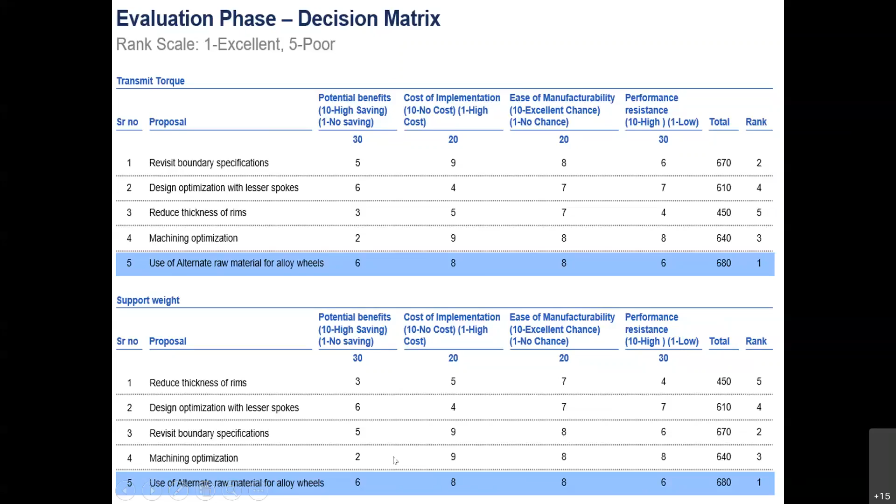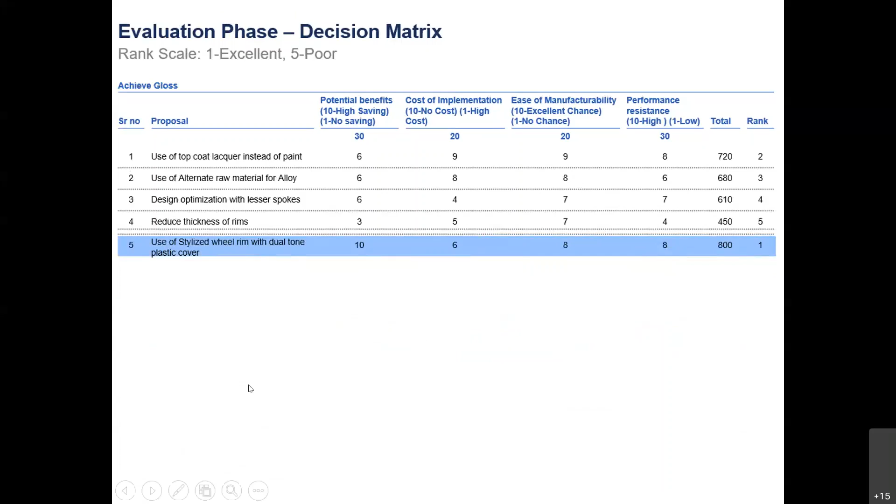To improve aesthetic, I'm going to take the idea to use a stylized wheel rim with dual tone plastic cover. So I need to evaluate the ideas, and based on the evaluation, the ideas having the highest ranking you need to take for implementation.

But again, I told you, you need to go for the analysis of which is easy to implement and where cost saving will be higher. Sometimes the implementation may be hard, but the saving will be higher. So you need to go for use of stylized steel wheel rim with dual tone plastic to improve the aesthetics. And you can also go for use of alternate raw material in alloy wheel. Combining these two ideas, you're going to get a very good cost saving.

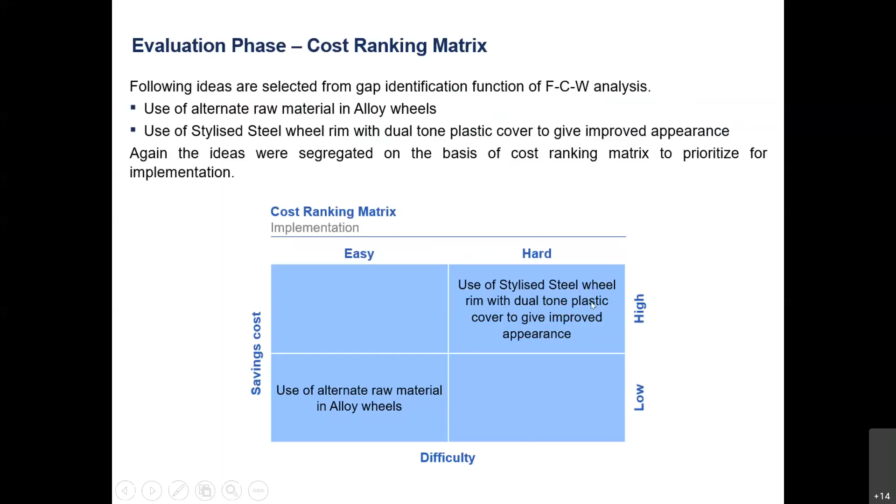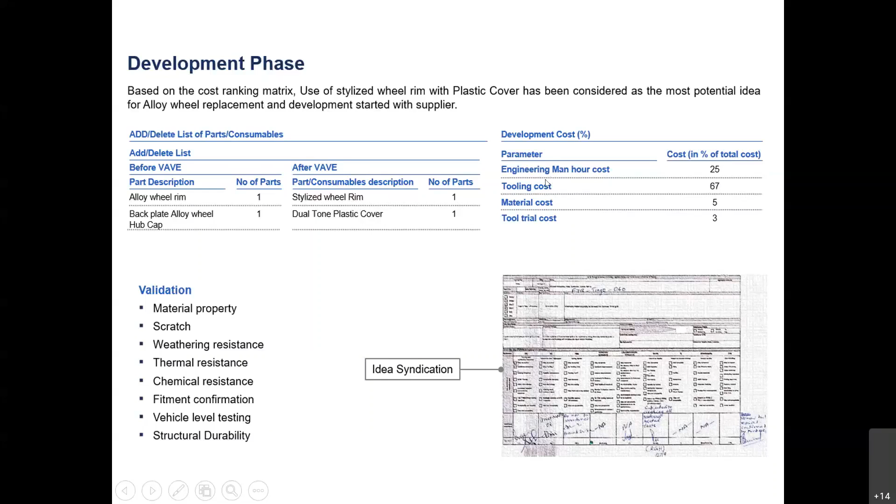So here there are two ideas. The first idea is we are going for a stylised wheel rim. Initially it was an alloy wheel rim, and after VAVE, without affecting the function, we are going for a stylised wheel rim. And initially you had a back plate alloy wheel with a hubcap, and we are going for a dual tone plastic cover. Here you have a lot of cost saving. The cost saving is much higher here, but you also need to spend some money for the tooling, material costs, etc.

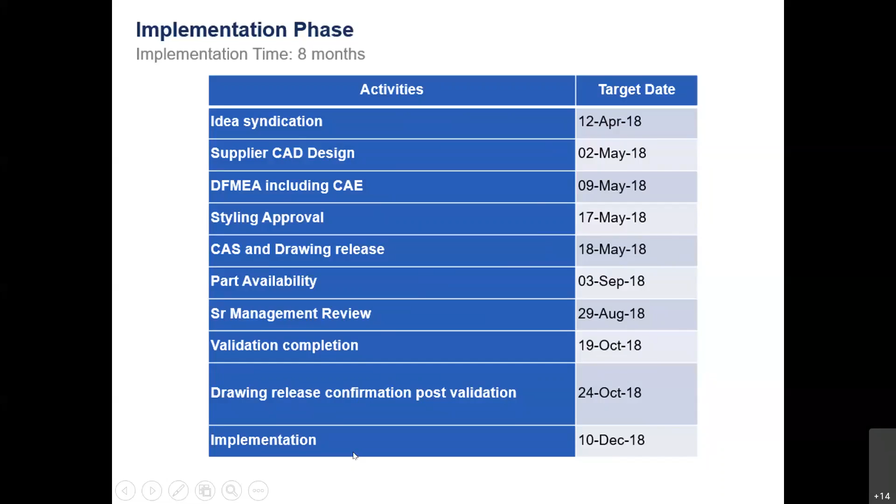So what is the benefit you're going to get out of this? You're going to have 50% cost saving with respect to the alloy wheel. And this can be applied even for new segments also. And you're going to get a stylish look, and this will help you with value improvement. This is the last example of an infotainment system. With this, I'm going to close, and maybe you can put your queries in the chat box.

The question here is: what is the priority, or satisfaction? Okay, so the priority here is always customer satisfaction, but normally the customer will expect lower cost. At the same time, they also want the functions or the performance. So here the priority is the functions. Function is your priority. When you achieve the function, automatically the performance will be better and ultimately you can satisfy your customer. So the functions with optimum cost could be your priority. Obviously, you can easily satisfy your customer if you achieve this.

So this is the second case study, which involves the value analysis of infotainment in a passenger vehicle. It is an infotainment system. So what is a vehicle infotainment system? It combines entertainment and information display to the driver and passengers through audio video interface, touchscreen, and buttons. So, the infotainment system.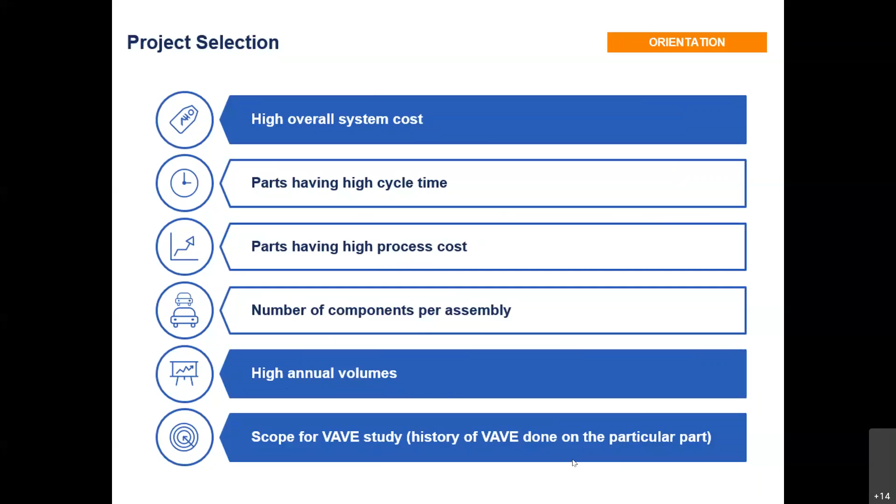So as I said, you need to start with a random function, the basic function, and secondary functions. What are the functions of a vehicle infotainment system? It should deliver entertainment, a basic function. It should display information. It's also a basic function. It should transmit energy. It should enable an input. It should display graphics. It should process information.

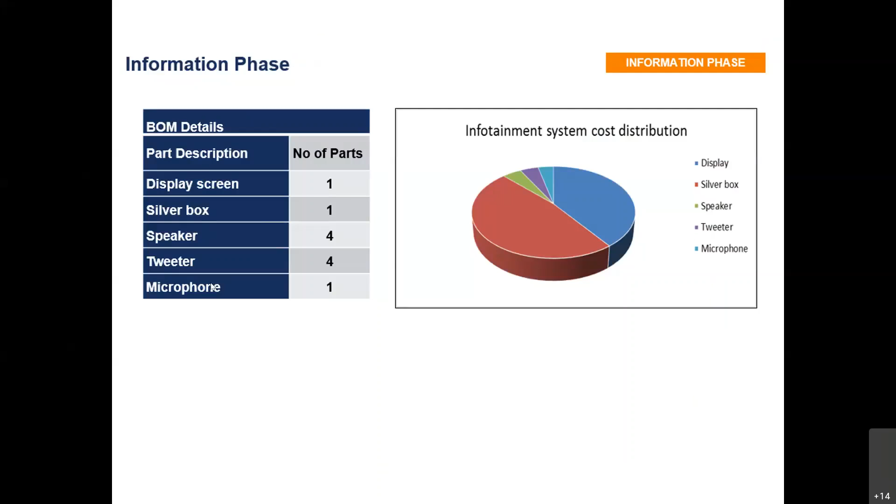It should enclose components, enhance aesthetics, support components, amplify signal, transfer heat, convert energy, regulate energy, store data, provide interface, and also fix components. So you need to list down all the functions. But here, it has different parts: display screen, silver box, speaker, tweeter, microphone. I have clubbed everything in a single thing, but you need to individually write down the functions.

Then you need to go for a random or a FAST diagram, and you need to go for a how logic, why logic. The basic function is to provide the interface, basically to entertain the user. How to provide a user interface? By providing input. You have different functions with respect to different applications. For example, you have the settings. You can also change the setting. You can also connect the USB to your infotainment, and receive the signal. It can be AM or FM.

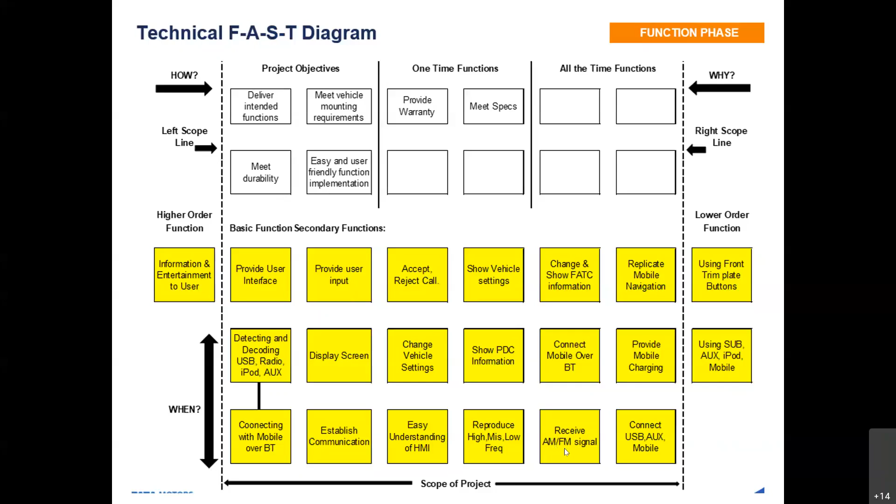Back to the cost and worth analysis. So with respect to the individual functions I told you about, you need to understand the function cost and also the function worth. When you have a gap between cost and worth, function cost by function worth, there is always a potential. You can look for new alternatives. So you find the gap is more here to deliver entertainment. So the worth here is to use a commoditized standard display, and to transmit energy, reducing the wire size or length can be an option.

And there are some other examples. To fix components, you can look to optimize the infotainment mounting points. You can reduce the number of mounting points. That way, you can reduce the value gap and at the same time increase the value. There are different other ways, like PCB size reduction, integration of speaker components, reducing the thickness of the heat shield, integrating the component display unit. But you need to consider the basis of worth considering the functions. Function is always very much important.

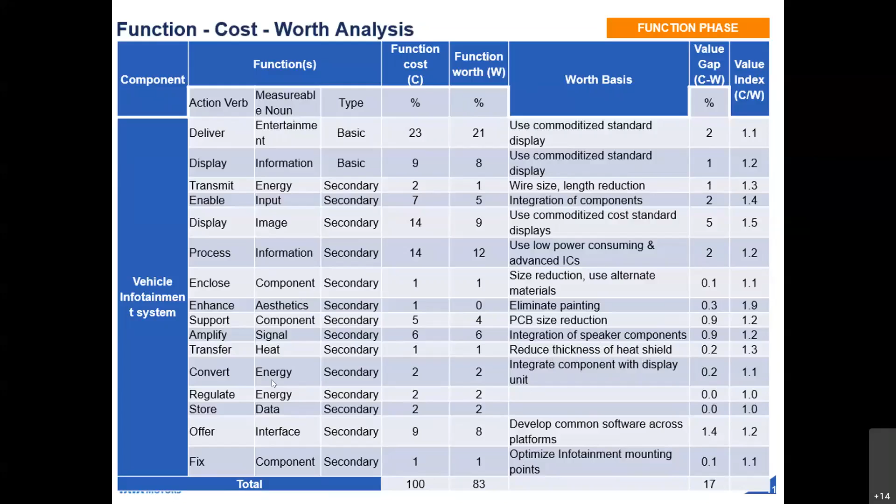Then you go for idea generation. This idea generation basically comes from the functions. So for delivering entertainment, you go for ideas to integrate the display and silver box, to go for a bigger 7-inch display, which is a new generation and commoditized panel in the world electronics market. This way you increase the value and at the same time reduce the cost. For displaying information, you use a low latency display within permissible limits. And to transmit energy, I'm going for wire size and length optimization and plastic connectors in place of special connectors. Like this, I generate new ideas for the individual functions.

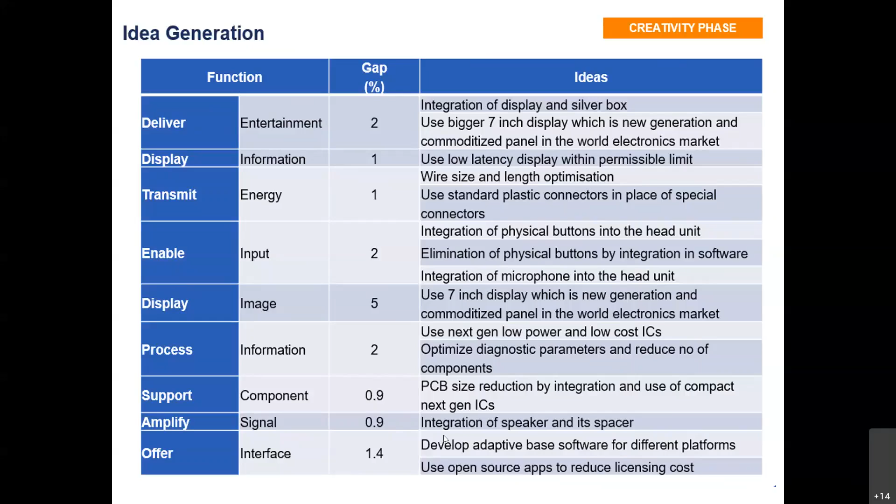What I'm going to do is evaluate the ideas with respect to the benefit, cost of implementation, manufacturing feasibility, and also the performance resistance, etc. I get more points for the idea to use a 7-inch display, which is new generation and a commoditized panel in the world electronics market. When I go for this 7-inch display, the cost is going to be lower, and at the same time the performance is going to be better. I can also go for a standardized plastic connector in place of special connectors.

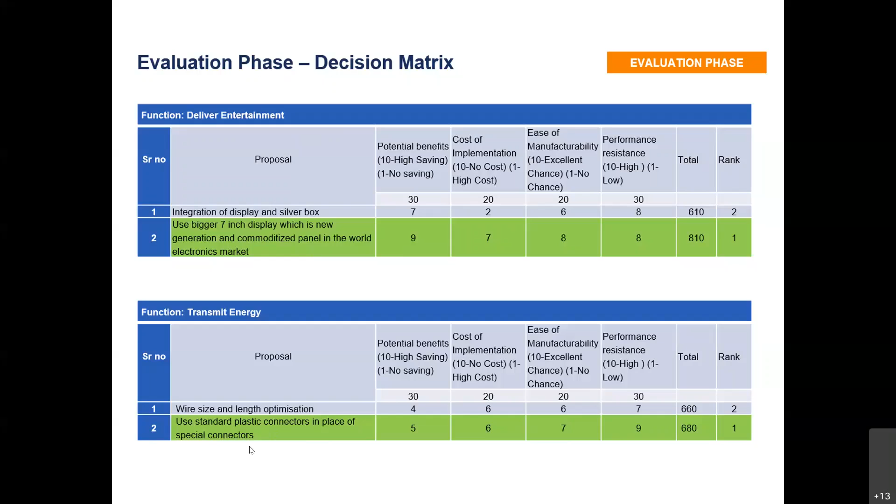And I get some other ideas, like elimination of physical buttons by integration in software. Sometimes you don't have buttons nowadays, just a touch screen. You can go for those ideas for infotainment. And you can go for next generation low power and low cost integrated circuits, and develop adaptive software for different platforms to reduce software cost.

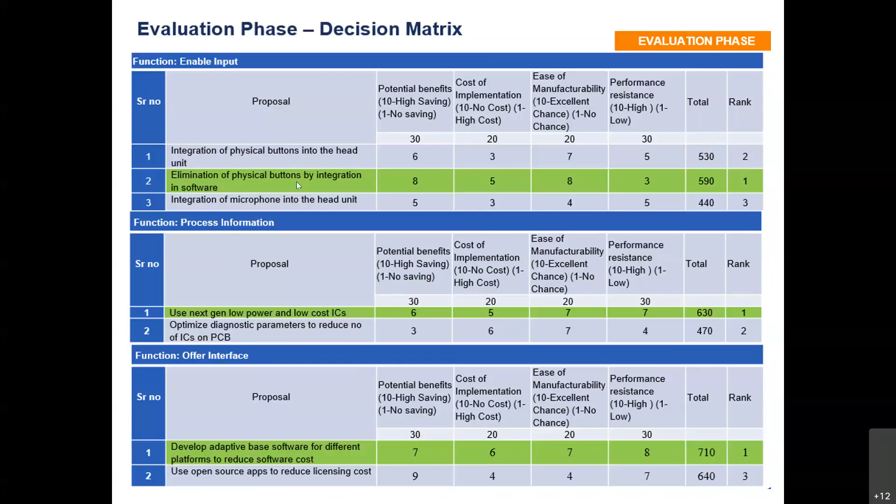So here the function is the interface, and here the function is to process the information. You select this idea for this particular function, this idea for that function, and so on. Finally, you go for a tabular column. You put the ideas you selected, whether each is easy or hard to implement, and what the cost saving will be.

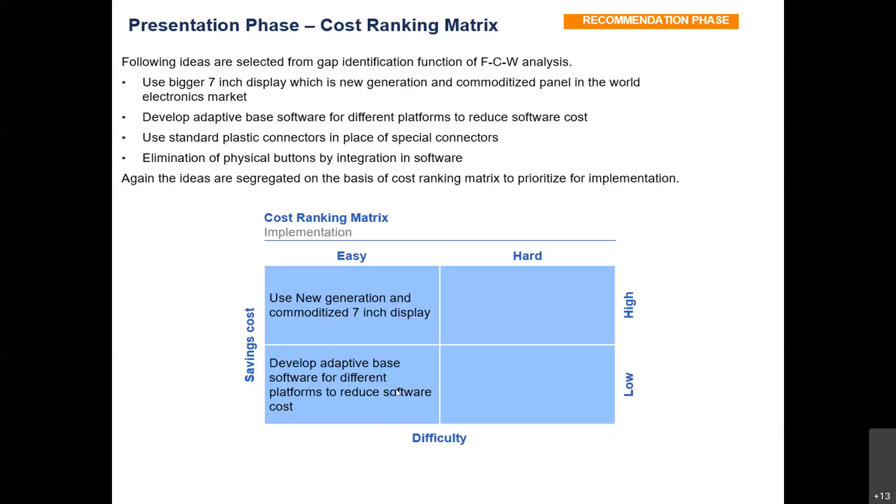And again, you need to go for the development where you need to do all the things, etc. So initially it was a 6.5-inch display screen. Instead of 6.5, you are going to commonize it to 7-inch. It's not that because of the size increase, the cost is going to increase. So now this 7-inch is a new generation one, which has been commonized across all OEMs basically. That's why the cost is also going to be lesser. At the same time, the performance is also going to be higher because it's the advanced version.

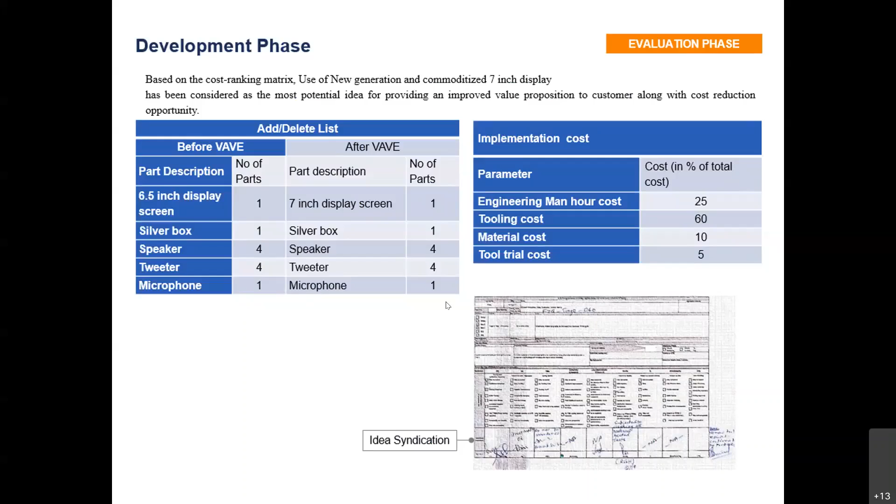So again, you need to have the development plan: when you're finalizing the concept, when you're going to get the part for validation, when you're going to have the drawing release, when the product will come for production, then when you're going to implement it, you need to have the plan for it. Okay, so with the help of this, I'm going to have a cost reduction of 15%, I'm going to improve the value for the customers, and I'm going to have better software which will be commonized across the various platforms we have.

Now I will show you the website of value engineering, the Miles Value Foundation, and also the Society of American Value Engineers.